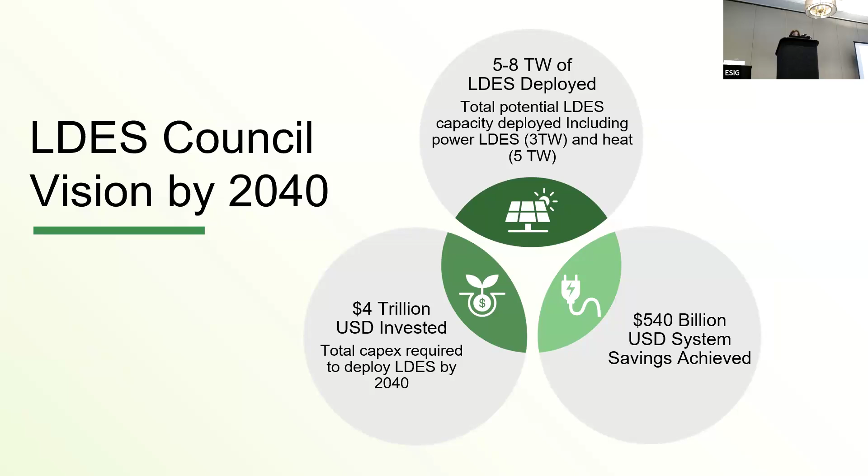So this is just a little bit of a snapshot into the scale at which long duration energy storage deployment needs to grow for us to be able to hit that 5 to 8 terawatt mark by 2040. We're far from there at this point, but we look forward to addressing some of the key questions, fundamental questions in terms of power systems and reliability to be able to fairly value and recognize these assets and hopefully demonstrate the bankability that will help us get to this deployment target.

So these are, as mentioned, some of the members that we represent. We have a fair number of technology developers, over 60 members across the ecosystem. And this diversity of members really reflects the breadth of LDES technologies, which I'll go into in a moment.

But in terms of the applications of LDES, LDES isn't a single purpose asset. It's used to firm renewables. It's used to manage congestion. It's used to provide backup during extreme events. It's used to shift energy across hours, days, or weeks. And its versatility is its strength.

Here we will be focusing on the power to power aspect of it - LDES as a grid scale transmission alternative, LDES in microgrids and distribution systems, and LDES in off-grid applications as well.

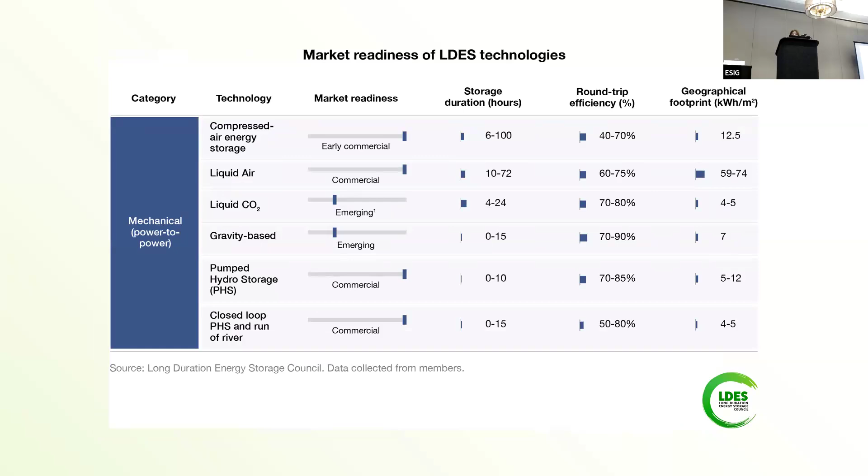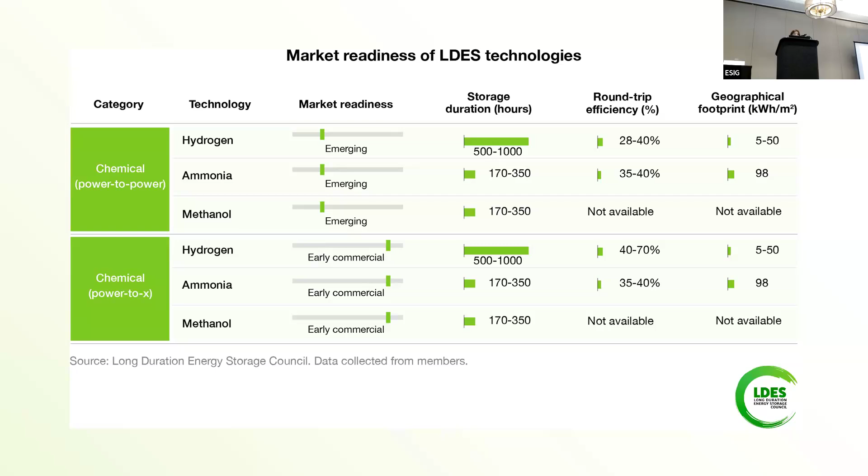So all of these different energy storage technologies fall within the definition of long duration energy storage. The LDES Council goes by any storage asset that can discharge continuously for 8 hours and up. That is our official definition. It's not necessarily scientifically rigorous - the US DOE has a definition of 10 hours and up, and some East Asian countries have much shorter durations that they consider long duration, from 5 to 6 hours and up. But this is what we go by, and therefore any storage system that can achieve these capabilities is considered long duration energy storage.

So as mentioned, long duration energy storage has multiple different capabilities in terms of risk management, in terms of real-time operations and beyond. It's used to firm renewables, it's used to manage congestion, used to provide backup during extreme events, as grid stability and power quality services, black start services, etc.

And most of the technologies within this range of energy storage can provide a variety of these services. So just to set the stage for the panel that we're about to have on accreditation and valuation of LDES systems, this remains an obstacle towards the deployment that we seek for long duration energy storage.

And the biggest bottleneck isn't the technologies, they exist, as I mentioned, but the bottleneck is planning. And most systems, I think we know, treat a 4-hour battery and a 100-hour storage asset the same. And the frameworks that we use to accredit capacity and model resource adequacy don't reflect the endurance, flexibility, the temporal range, or the resilience that LDES provides.

In addition, we're working with the traditional resource adequacy metrics. We had a panel yesterday on resource adequacy and how that is going to evolve, with perspectives from different ISOs. But the fact of the matter is it's important to take a look at these metrics that are used to value resources such as long duration energy storage, and reflect on the trade-offs between cost and reliability, or the value of preventing rare but severe events, which is where LDES specifically provides a lot of value.

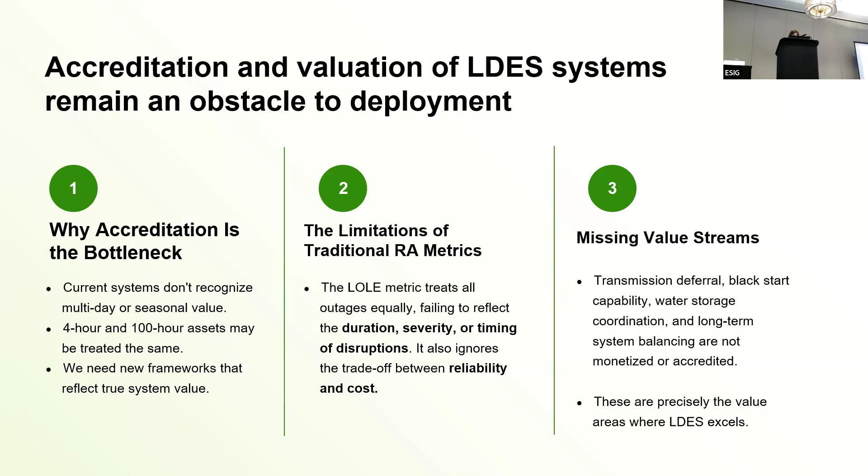With that being said, I think we can move on to some of the framing questions for this panel. Since we have varying perspectives from our speakers today, I just wanted to help our audience keep these questions in mind. How do we capture the true system value of LDES accurately, including multi-day reliability and seasonal adequacy? What are some operational data and insights that could shape how we model and accredit LDES today, known as a very difficult resource to model accurately? And what are the right metrics when it comes to looking at LDES systems? So that being said, today's session has 4 critical perspectives that you will now hear.

And I would love to call upon Gabe Miller, hydrologist from TVA, for his presentation.

Good morning. Thanks for braving the early morning with us here. I work for river management at the Tennessee Valley Authority, and I'm going to talk to you a little bit today about one of the oldest forms of long duration energy storage, which is conventional hydro. So I'm going to talk about how we manage our hydro system, and then also how we integrate and optimize our hydro system with our production cost model and the rest of our assets at TVA.

So a little bit about TVA. TVA is a unique organization in the sense that we are a federally owned utility company. We were founded in 1933 as an act of Congress. And really the reason it was founded was to electrify the Tennessee Valley, which was very underserved at the time, to promote flood control, navigation in the Tennessee River, which had a lot of flooding issues at that time, and also to promote economic development for the region that was very poor at that time.

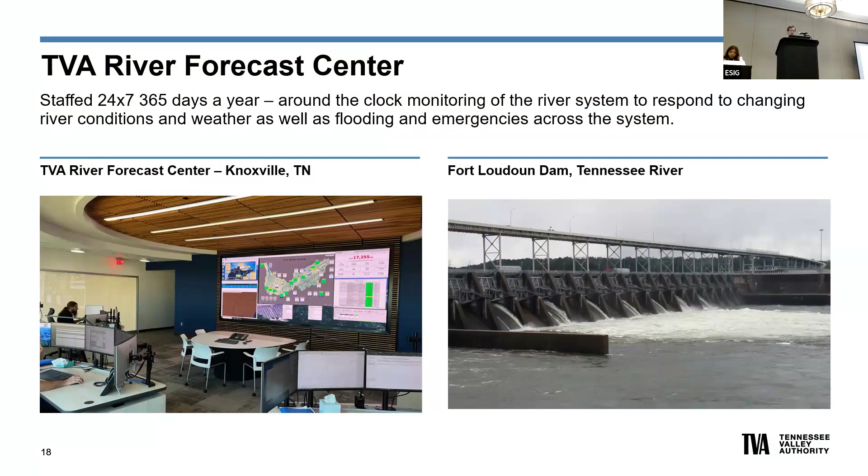So we have a 24/7 river forecast center in Knoxville, Tennessee, about 3 hours east of here, and that is where we manage our river system. We have a system operations center where we manage the rest of our assets in Chattanooga, Tennessee. And TVA also has a small office here in Nashville.

So just talking a little bit about what goes into how we manage the river system, I want to kind of frame that as we get into more of the power modeling, because a lot of that policy is really important in terms of what flexibility is left over for optimizing our hydro assets for power generation. And really the six major categories in terms of what we're looking at when we're managing our river system are: flood damage reduction, power generation, navigation, water supply, recreation, and water quality. And of course, there are other factors that go into that, but those are kind of the six main categories.

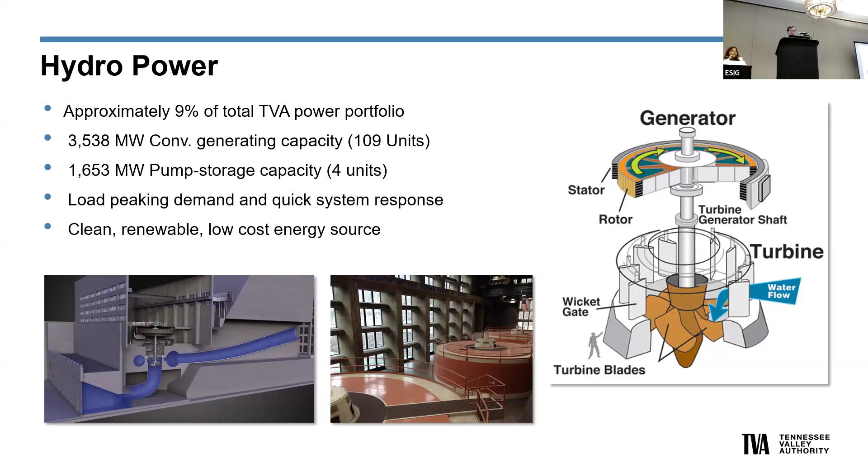So I mentioned that our hydropower is about 9% of our total portfolio, about 3,500 megawatts of conventional hydro. We have one pump storage facility as well, and we're considering building another pump storage as well. And Stuart's going to talk more later about pump storage valuation that we've been working with him on, valuing that as a future asset.

In TVA, all of our reservoirs are seasonal, so we don't have any multi-annual energy storage. Mainly what we're doing is raising the reservoirs up in the summer for recreation, water supply, and navigation, and then drawing down in the winter, which is really for flood control as the primary purpose. Our drier months are in the fall, so that fall drawdown also serves as water supply.

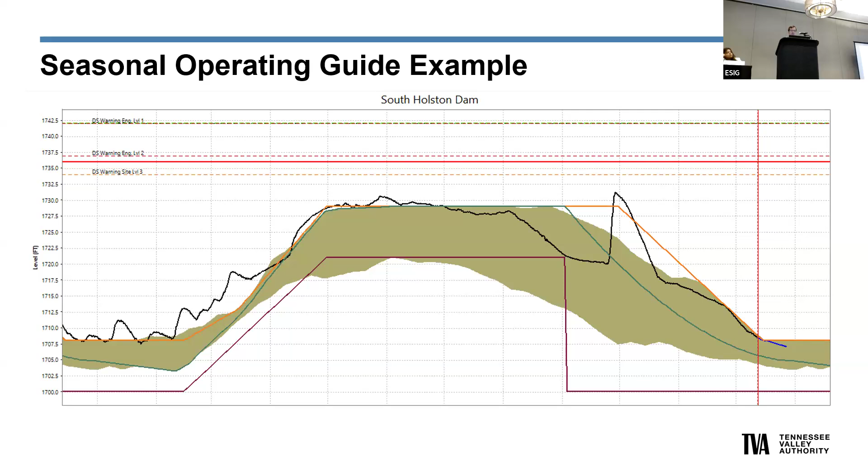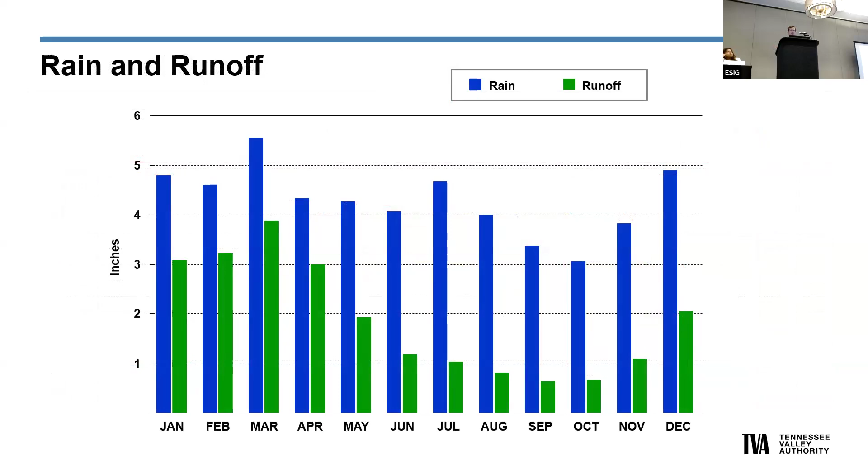Getting into that, we get about 51 inches of rainfall a year. Even though we're kind of equal on rainfall every month, the majority of the runoff is really in the winter months. That's because we have less plant withdrawal and evapotranspiration, which takes a lot of water out of the system during the summer months.

So one of the things I talked about was flood damage reduction. We have a number of tributary reservoirs, the ones in blue in that picture, and those are really our main storage reservoirs. We're storing water there, trying to keep it off of the main stem of the Tennessee for flood damage reduction.

One of the recent events, although TVA couldn't do a lot about it because it was more outside of our region, was Hurricane Helene last year, which did a lot of damage to Asheville and the surrounding area. This is actually some drone footage from Nolichucky Dam, one of our reservoirs, taken after the peak since it happened in the middle of the night. It actually blew a hole in that powerhouse. This is an old sedimented reservoir no longer used for power generation, and they've since gotten rid of that powerhouse, but it just reminds us of the power of flooding, which is one of our primary objectives.

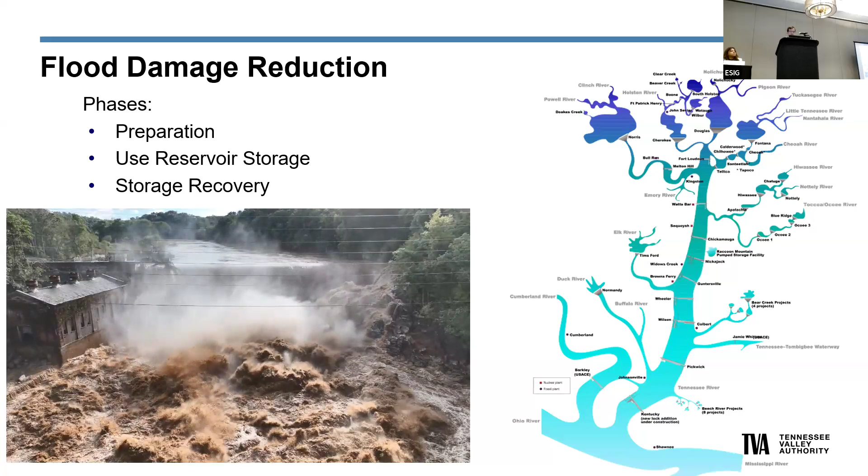Navigation: the Tennessee River is navigable all the way from the Mississippi up to Knoxville, Tennessee, as well as the Cumberland River, which is managed by the Army Corps of Engineers and can go past Nashville as well.

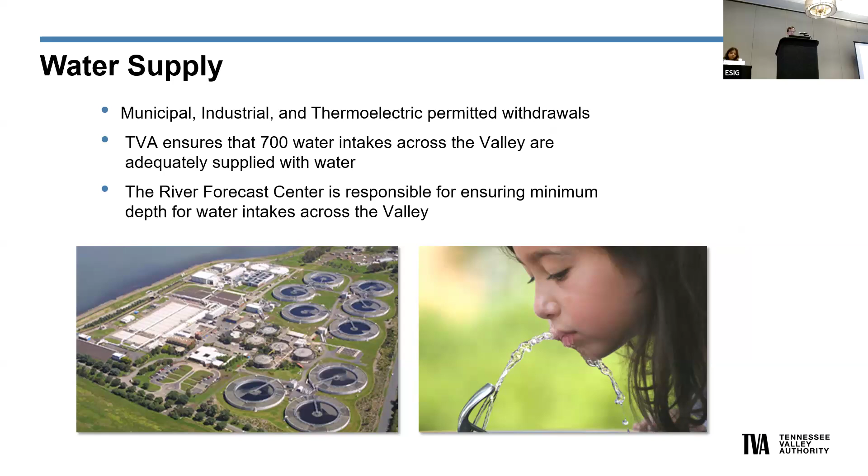Water supply - definitely not like out west. We don't have any of the water supply concerns that they do, but we manage minimum flows for about 700 water intakes throughout the valley. It's not as difficult as the water concerns out west.

Recreation is a huge part of what we manage the river for. The Tennessee Valley area is really known for its lakes, lake life, recreation, and fishing. There's also whitewater, so there's a lot that we do to manage recreation in the region. The University of Tennessee estimated it brings about $1 billion of economic benefit to the valley every year, which is something we like to pat ourselves on the back for.

Then there's water quality. We do a lot to try to maintain water quality in the river, whether it's pumping liquid oxygen into some of our reservoirs, using aeration structures, auto-venting turbines, and addressing other things like temperature concerns.

TVA is a little unique in that we can operate our river to help meet some of the temperature demands of our nuclear plants, especially Browns Ferry, which is downstream on the Tennessee River and gets really hot there. The water temperature can get to 85 or 88 degrees going into the nuclear plant, like a warm bathtub.

So we have a lot of temperature concerns around there, and we have 3D models we use to analyze the temperatures to help meet the permitting needs for how much we can increase the water temperature. You can see the outflow from Wheeler Reservoir in this picture, and the intake is right there. One interesting thing about Wheeler is that because the intake and outflow are so close, if we're peaking in the summer, you can get a sloshing effect where the water hits the downstream edge of the reservoir and sloshes back, sending that warm water back into the intake.

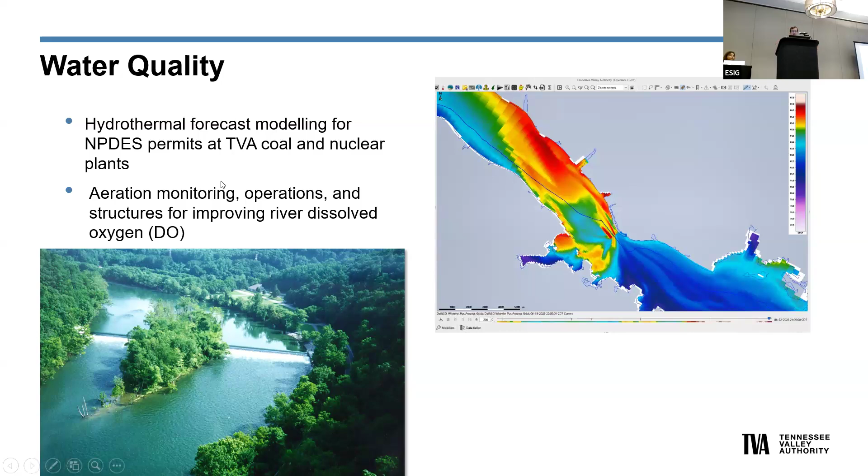So one of the things we do with hydro is try to maintain some steady flow during certain times in the summer, which also limits how much peaking we can do to meet demand for other things. So that's one of the constraints on how we manage power for the hydro system.

Talking about all of this, you can see a lot of these challenges: if you want flood control, water quality, and thermal compliance, those all want low reservoir levels, whereas navigation and recreation all want high water levels. So it's just a matter of balancing all these different objectives in terms of how we manage the system.

So I'm going to get into a little bit more technical nitty gritty now about how we do the optimization of our hydropower. There's a lot that goes into that, but I'm just going to specifically talk about how we integrate with our production cost model. One of the primary tools that we use is a program called Riverware, which is really where we're turning our water constraints into goal programming.

Specifically, we're moving towards the portfolio optimization model from ABB. And so we've come up with a new method. I guess one of the things I should mention first here is, TVA is not in a market, so we're a little bit unique in that sense.

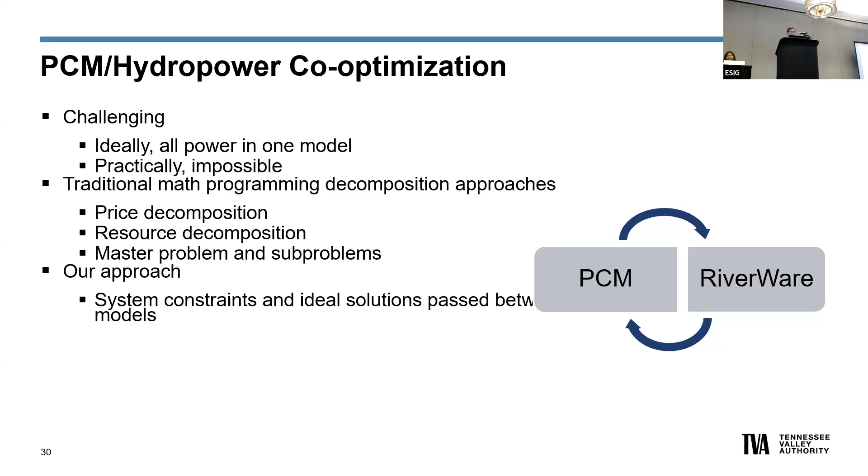And so the approach that we've taken is really we run a Riverware model that is an optimization model that comes up with really the constraints of our hydropower system. And so that gives us hourly min-max generation, daily min-max generation, and a 10-day target.

And this is passing to the production cost model as a single unit. So it's really simplifying the solution, saying all of our hydro is just a single unit in the production cost model, whereas we have over 100 different generating units in our hydro.

And then we run that production cost model, and it comes back and it gives us an idealized hydropower solution for this is what would be ideal in our system for running hydropower over the next 10 days. And then we ingest that back into those other subsequent models in our Riverware as an optimization goal.

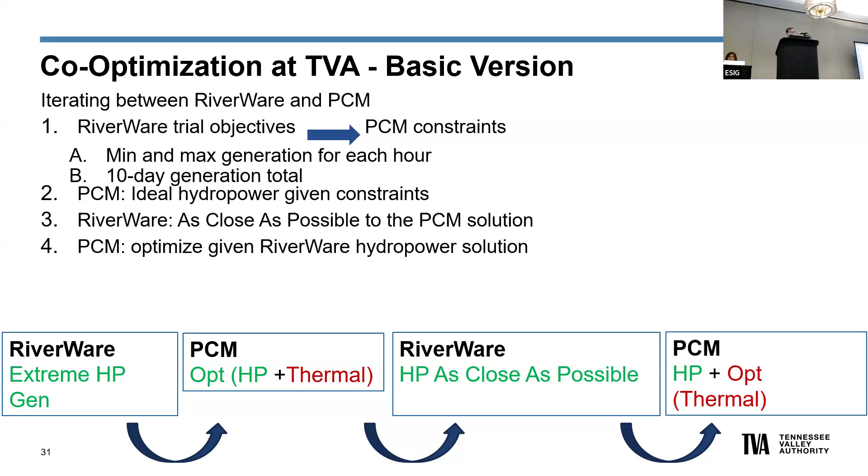So just a little bit of a diagram here to help wrap your head around that. We have a lot of physical modeling that goes into our hydropower system, whether it's modeling inflows, our hydrology into our system. That's where we're using a lot of similar tools to everyone else that was talked about yesterday.

We're starting to look at AI weather forecasts. We're starting to look at AI inflows, and a lot goes into all that modeling for how we model our hydropower assets. All of that data goes into these decision-making models, the Riverware.

Those hydropower constraints then go into that production cost model, which gives us back that idealized hydropower schedule that then goes into our short-term and our midterm Riverware models.

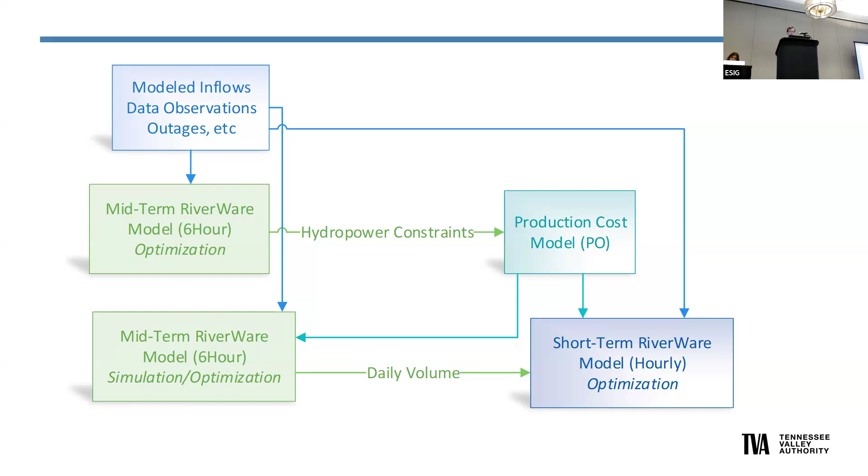And that short-term model is really what comes up with our schedule for the next day as far as hydropower, and then a preliminary one for day 3. So we actually do this twice. We do an idealized one with as most flexibility as possible, and then a more realistic one, and try to be between those two.

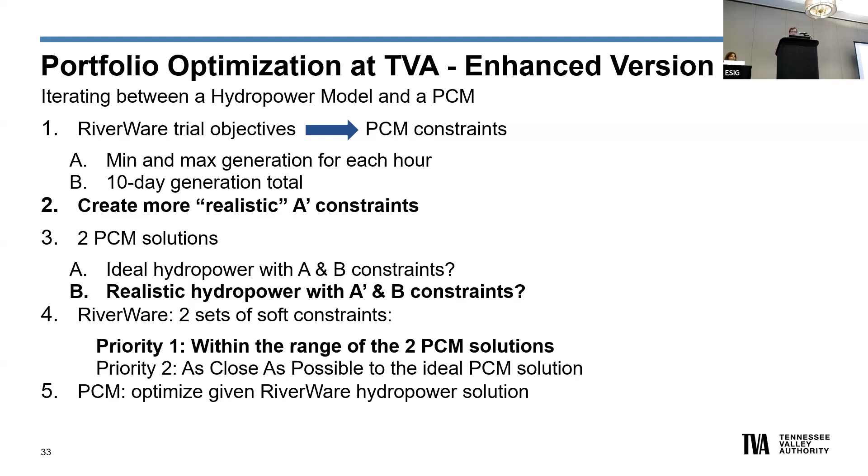So you can kind of think about the optimization here is we have all of these constraints on our system, and really what they're doing is shrinking the optimization space. All those other demands, whether it's flood control, water quality, they really limit the amount of flexibility that we have in hydropower. And so whatever flexibility is left in that optimization space is what we're using to try to optimize that hydropower generation for the rest of our assets.

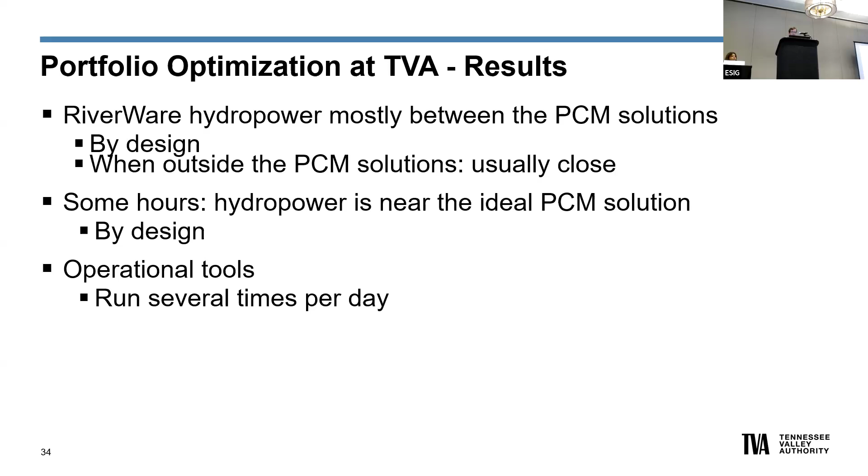So that's been working really well. We're actually just moving towards this new portfolio optimization model. We'll also probably integrate with some new GE tools that we're using. So it's a kind of a unique method that we're using for this hydropower optimization.

And we have some potential enhancements. We can get more data into our production cost model to get more realistic things like ramping constraints. I think where we're moving towards is we're mostly optimizing our hydropower on that two-week period where we can move water around for a big event, or on that day ahead.

And I think as we integrate more renewables into our system, we're going to get pushed more in hydropower to have more real-time flexibility. We do have real-time flexibility, but most of it's the balancing authority will call up and say, what can you give me right now? Or what can you turn off right now during a turn down situation?

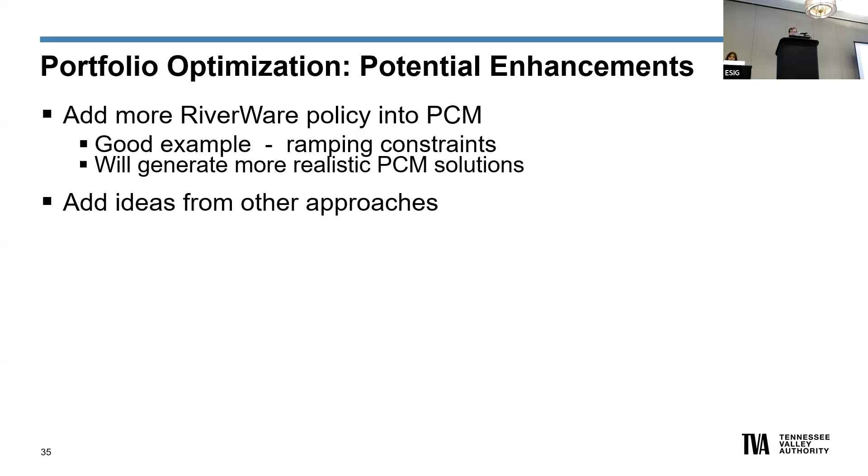Got a little lazy there for a second. But thank you, Gabe, for a really compelling look into TVA's hydro operations and how optimizing tools navigate real world constraints. So that operational ground gives us a really good starting point for the rest of our panel speakers.

Next, we'll hear from Stuart Cohen at NREL, who will bring a planning and modeling lens to the conversation, with a focus on valuation of pumped storage hydropower.

Great, so thanks everyone for being here. I'm going to give a pretty broad overview of a lot of things that we have going on in the pumped hydro space. So for those less familiar, I'll start with just kind of a why pump storage, why are we thinking about pump storage valuation. I'll introduce you to a lot of the things that we're doing at NREL on the data and tool side to help with these questions, and then I'll get into specifically how we're using some of those with TVA, so it'll be a good follow up from what Gabe was talking about.

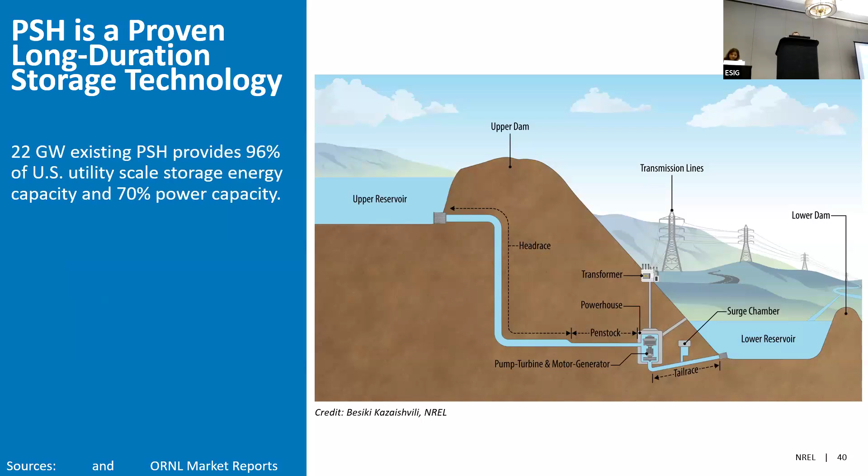So first off, why are we looking at pump storage? If you're less familiar with this technology, it's a proven long duration storage technology. In the US today, we have about 22 gigawatts. And while batteries are certainly making really rapid inroads in the capacity space, from an energy perspective, pumped hydro is still well over 90% of the energy storage capacity in this country.

And so today it's the only really widely deployed long duration storage technology from an energy perspective at the utility scale. And if you're unfamiliar, there's actually a lot of action, at least in the licensing and permitting space around pump storage in the US. The development pipeline has around 100 gigawatts in some stage of the process. There's only a very small portion of that in the detailed planning stage.

But what's also good to put into perspective is that globally, there's a lot of action in this space. So 50 gigawatts is currently under construction. A lot of that is in China and those countries, but also in Europe, India. So there's a lot of global demand for looking at these long duration storage energy solutions. And that's one of the reasons why in the US, we're thinking about, okay, well what is a way to advance our understanding of the value proposition to serve the needs of the future.

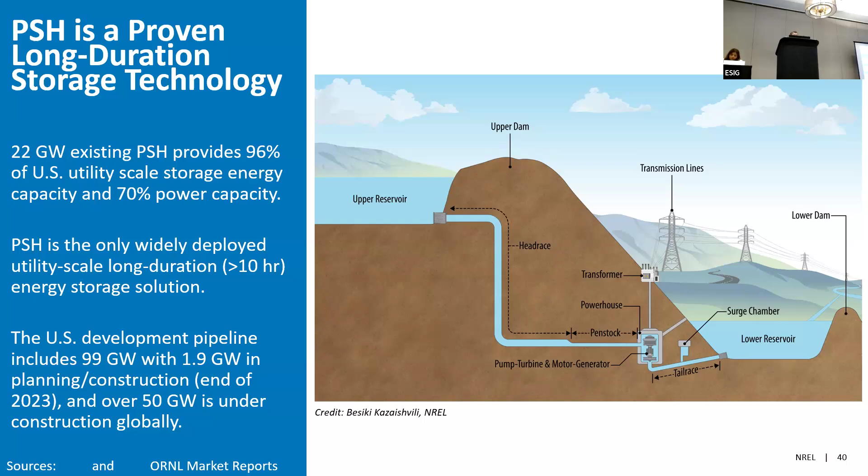And so the reason for thinking about pump storage, and I already saw a similar table as this, is that it can really provide this full range of grid services, all the way from your bulk capacity energy services, all the way down to short-term stability, frequency stability, voltage control, and even system restoration, black start. And so it definitely depends on the facility, because oftentimes these are hydropower facilities integrated into river systems. But in general, these units can ramp really fast, switch relatively fast, maybe not quite as fast as lithium-ion batteries, but you have a lot of flexibility just with the system designs.

Today, all of the pumps in the United States are fixed speed pumps. So that does have some limitations in flexibility, especially when you're in pumping mode. They're either really at a given pump at 0 or 100%. So that certainly limits a lot of the regulation and stability services it can provide in pump mode. But a lot of the conversations around the new proposed facilities are actually around variable speed units, and that's so you can get this full range of grid services, both in pumping and generation mode.

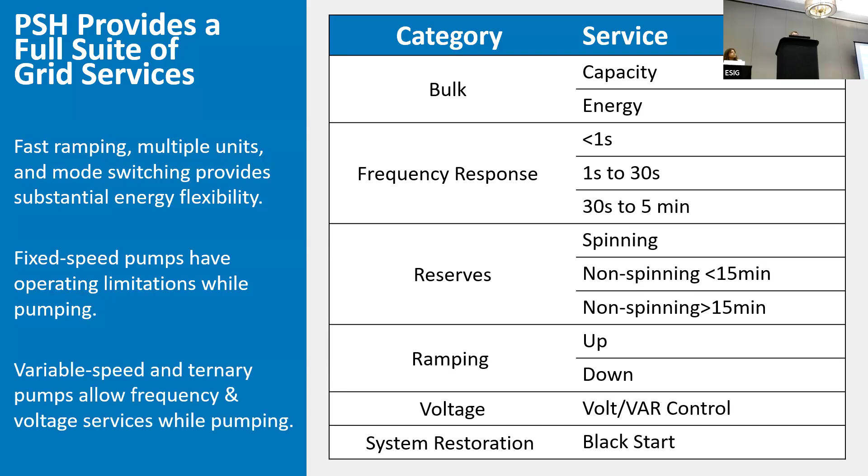Like I mentioned, and has already been discussed, one of the key challenges in this space is valuation. I have one slide to introduce you to what the labs and DOE are doing in particular to think about this space, and that has to do with an effort called the Hydropower Vision Roadmap. We put out a study back in 2016 looking at a future vision for the hydropower industry, and the labs are continually working with industry around framing what could achieve that vision and what actions should take place across the industry to meet those goals.

Since this is a new audience for me talking about this hydropower space, I wanted to introduce you all, because I think one of the stakeholder groups that might be less represented is the broader power sector community. We have a specific area looking at improved valuation, focusing on recognizing the value of different services, understanding how to compensate them, and then how to translate that into financing support. I think that's honestly a really consistent discussion across a lot of the long duration storage technologies and technologies that provide these flexibility services. I'm very interested throughout the rest of this meeting to talk to you all about this space.

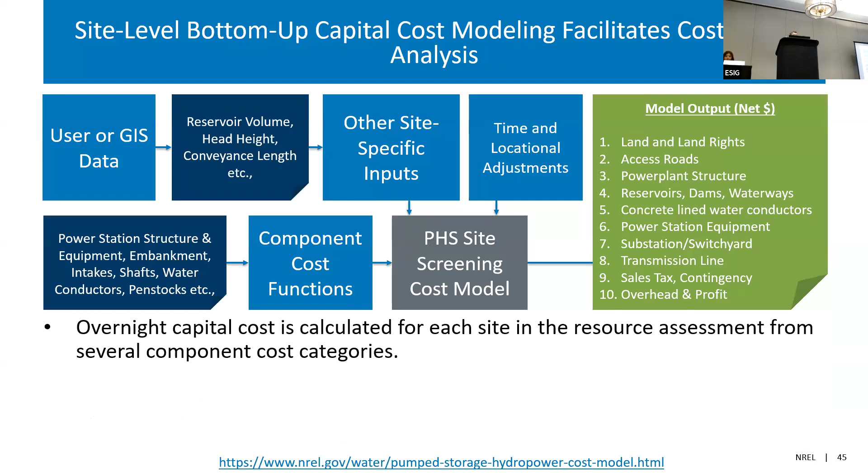Built into that is a cost model. We've worked with industry folks, engineering, procurement, construction firms, using a lot of the information available from an EPRI design guide, and built an actual bottom-up cost model to look at pump storage as well. That's another way we're trying to put publicly available, open tools out there for people to think about this technology and how it fits into their portfolio and their considerations. Right now we have a downloadable spreadsheet, but we're actually working on an interactive web tool to use with that as well.

Bringing this more towards what's probably the bread and butter of people in this room—how does that feed into the power system models? I'm not going to go through everything, but this slide gives an example workflow that at NREL we use for a lot of our studies, where we go one way and sometimes iterate between capacity expansion, long-term planning models, feeding those future infrastructures into production cost models, looking at resource adequacy, maybe even nodally downscaling those to run in power flow models and look at short-term static and dynamic stability, trying to create a fully integrated system modeling approach to understand what the future could look like.

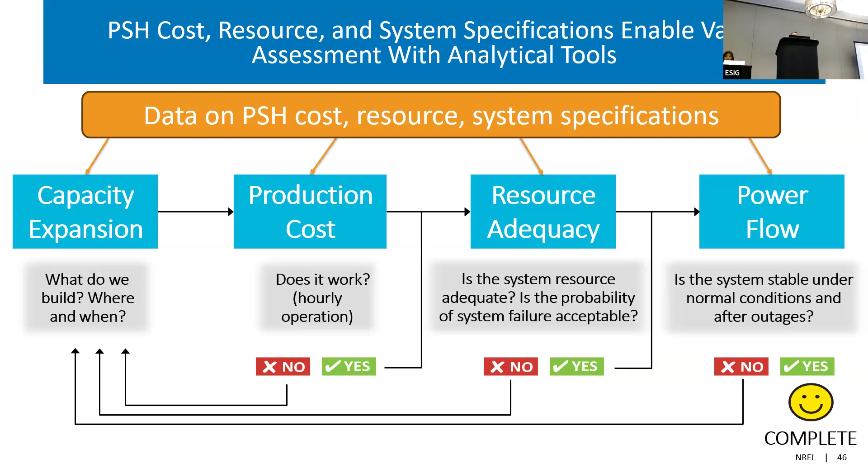The point I want to make in this context is that on the pump storage side, we're developing data and tools all the way from resource assessment, cost modeling, all the way down to dynamic models for variable speed pump storage systems, to be able to look at all this space.

One example of how we're doing that is with TVA. The Department of Energy's Water Power Technologies Office funded this work, and they funded a lot of projects looking at pump storage valuation—Todd from Argonne is here, they do a lot of that work. This is just one example: we're working with TVA to help them understand the value proposition for a potential new pump storage project, because of the challenges.

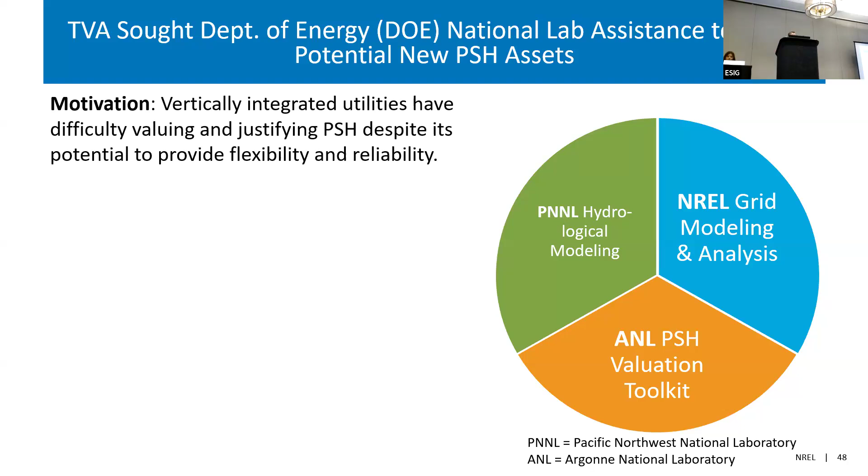These are multi-billion-dollar investments. It's one thing to finance a small 2-hour battery that's very modular and you can stack and grow over time, versus wanting to invest $4 or $5 billion in a new dam. So it's a different discussion with a bank, I'd say.

So this is a challenge. The idea here is to bring in some of the more research-oriented, forward-looking tools, thinking about different ways to represent long duration storage and other parts of the power system, and see how that influences the discussion around valuation.

We really did two things in this effort. One was to do a deep dive into looking at their modeling approaches and think about ways that could be tinkered with, improved, and expanded upon. The other thing was to do some parallel modeling and analysis ourselves.

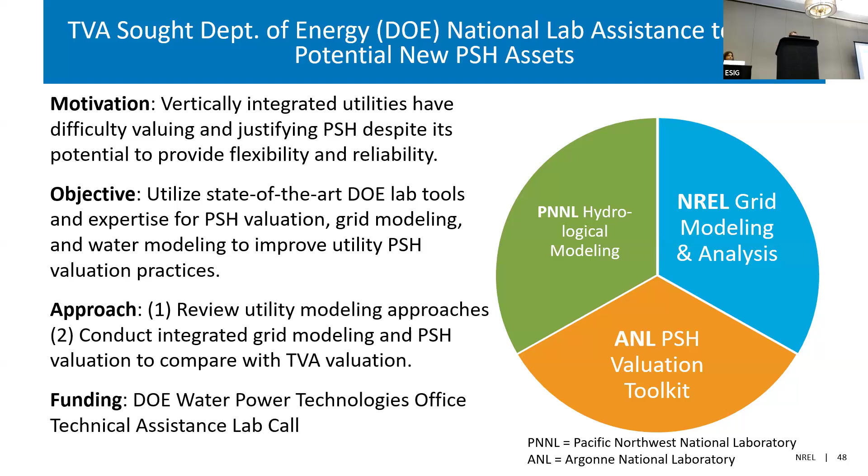This is from the Water Power Technologies Office. I'm going to focus on number 2 here in the interest of time. What we're doing in this study is a collaboration between NREL, Argonne National Lab, and Pacific Northwest National Lab. PNNL is focused on the hydrology side. Argonne is working with this pump storage valuation toolkit, which is more of a screening level valuation analysis. And at NREL, we're doing the rest of the stuff.

We have our ReEDS capacity expansion model that's currently fully integrated and iterates with the resource adequacy model, PRAS. Then we're taking those solutions, downscaling them into our PLEXOS production cost models. And on the side, in parallel, doing some power flow and stability modeling.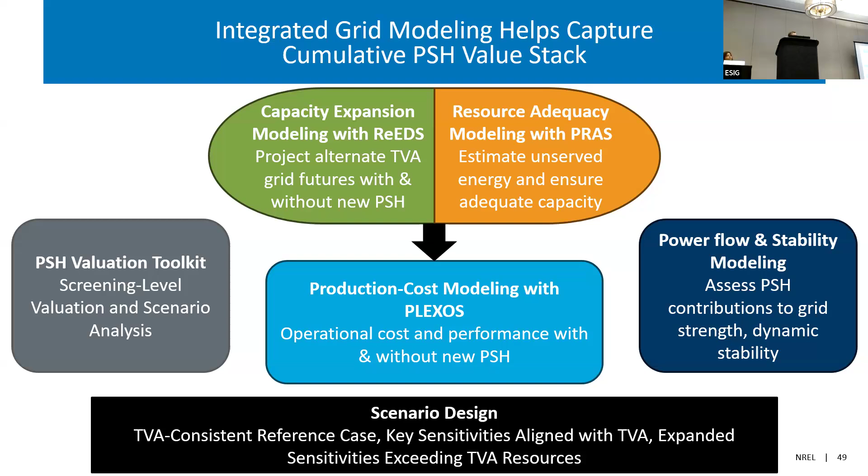I'm just going to briefly go through some of the preliminary findings we're exploring in this space. We're not quite to the point of giving the cost numbers and actual value assessments, but I just want to give everyone a flavor of how we're looking at this.

The first thing on the capacity expansion modeling side is to look at a range of portfolios. We've worked very closely with TVA, also thinking about what they're already looking at in their IRP procedures. We're defining different scenarios to try to get a range of technology mixes for the future.

This figure shows the 2050 capacity mixes and generation mixes in TVA for just a few of the scenarios we're exploring, just to show you the range of how we're tinkering with fuel prices, technology costs, and even deployment limits and considerations on variable renewables to look at these futures.

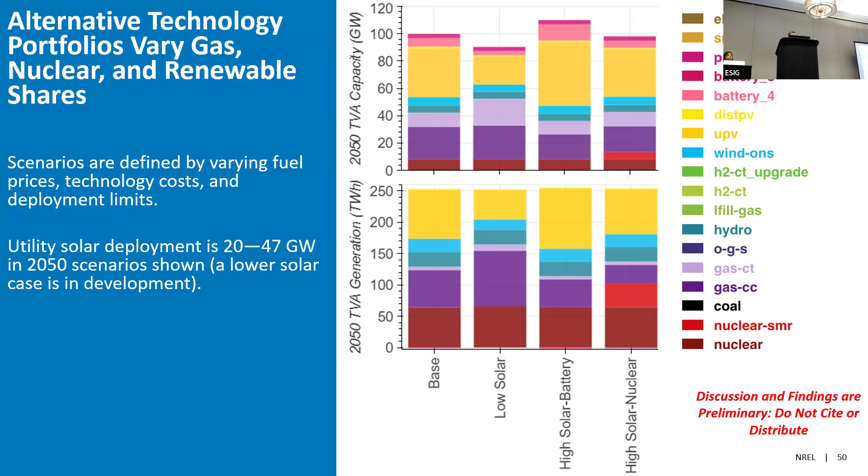For example, the scenarios shown on this figure are looking at a range of 20 to 47 gigawatts of solar in 2050. We're actually trying to get an even lower solar number just to get a bigger range there, because that balances out with what happens in the natural gas space, and even scenarios for what if there was some new nuclear deployment, small modular reactors, something like that, and so on.

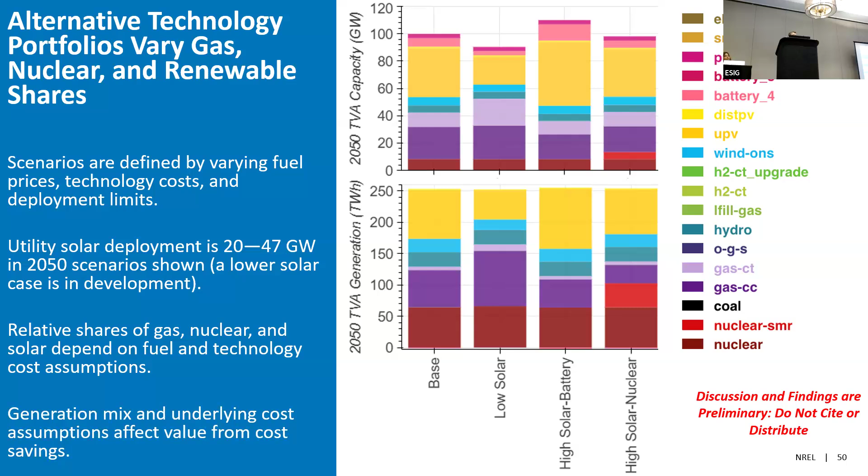The reason for this is because this generation mix is going to influence the value proposition for that pump storage unit. So for example, if you look at those four scenarios with and without this proposed new pump storage unit — I apologize, the colors here are challenging because the pumped hydro looks a lot like the 8-hour battery — but basically on the positive side you're going to see pumped hydro and maybe some other stuff.

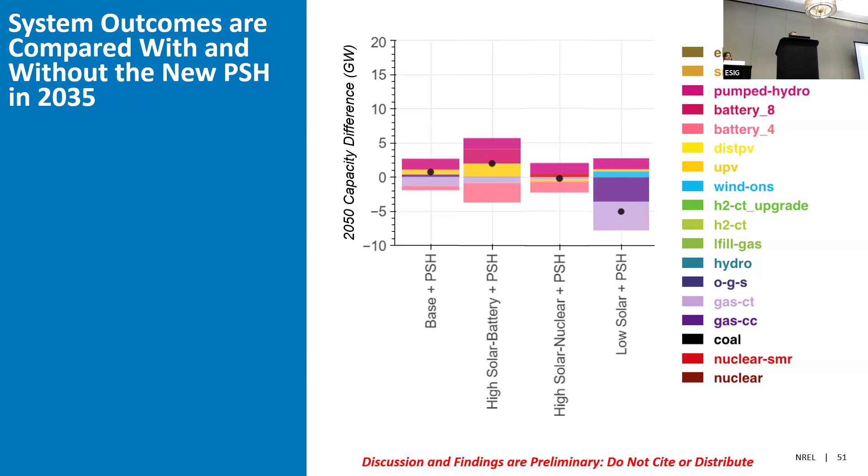On the negative side, it's going to be whatever wasn't built because that pump storage showed up on the system. This is preliminary, so I'm not going to make any strong conclusions about what's going on here. But the idea is that in these different scenarios, these different grid mixes affect what the pump storage might displace.

Generally, it's probably obvious to people in this room — they're going to compete and displace with other flexible technologies, batteries, and natural gas. But the extent to which it does that, and which technology it does that with, depends on the scenario.

We also see some complementing of things like solar and even a little bit, in this case, nuclear, which is interesting. So again, that's just to say that changes in infrastructure determine the impacts of pump storage on not only the investments, but also ultimately the costs. Eventually we're going to be looking at the cost implications of this and using that to inform some detailed financial analysis that Argonne is going to do. On the production cost side, this is even earlier stage.

So I just wanted to show some examples of what's going on. We're taking these planning model solutions and running them in 8760 dispatch simulations to understand how this new pump storage would operate.

One known operating challenge in a lot of regions is that we built these pump storage systems in the 70s to complement nuclear, knowing they'd pump at night and run during peak loads in the day. Now with all the solar, that's completely flipped.

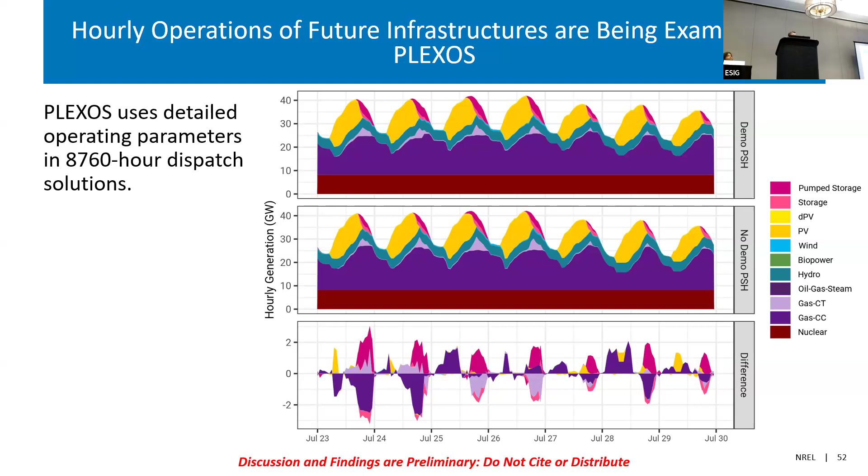So there are a lot of questions and considerations around when you're going to pump. Now we're thinking about pumping at the nominal gross peak load condition, which can create stability considerations. Those are the types of things we're starting to dig into with these operations models.

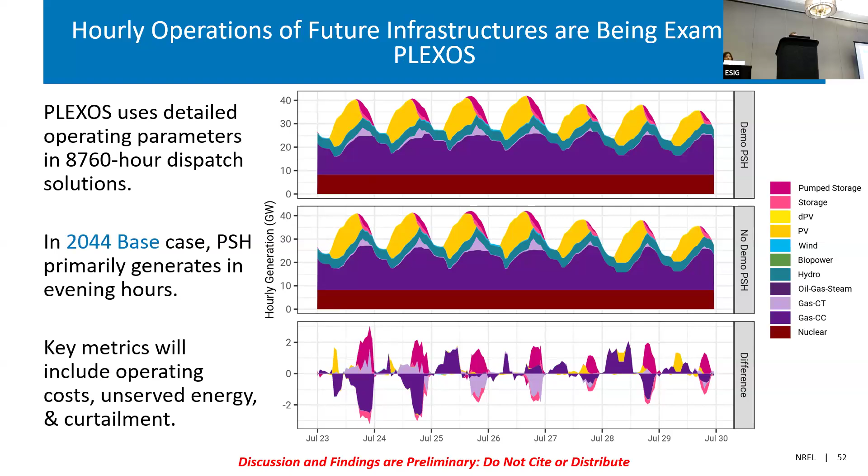You can see how in this example the pump storage is generally outputting electricity in the evening hours, early evening. We're going to be looking at the cost implications of this in addition to things like unserved energy, curtailment, and so on.

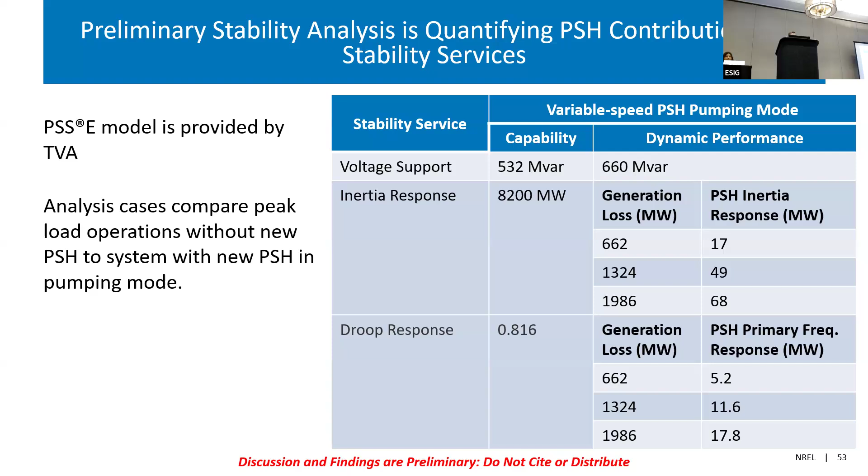This is an example of what we're doing in the short-term stability space. We're using PSS®E models that TVA has provided, looking at things like voltage support capabilities, inertia response, and droop response. I'm a mechanical, not an electrical engineer, so this gets further from my area, but we're doing a lot of simulations looking at the grid strength and stability implications of this new pump storage unit.

So that's what I cobbled together to present today. The key thing I want to leave everyone with is that pump storage is an established storage solution, but it has a lot of potential for the future. Understanding the valuation and compensation conversation today is really important because it's different than when we built these in this country in the first place.

NREL is creating a lot of data tools, and other labs are doing this as well to help inform this conversation. I just want to raise awareness of all that. We think a lot of the capabilities and tools we're building on the lab side can really complement what's happening on the commercial and utility side to have this discussion.

So that is all I have. And that's all.

All right, thanks Stuart. That was an amazing presentation and a clear reminder that even established long duration energy storage assets like pumped hydro can be undervalued if our tools and operational models aren't designed to fully recognize their contribution across different services and different scenarios. So thank you for that.

Next up, we'll be building on that with Donny Holaschutz from inodú, who is going to talk about how we accredit resources in the first place, before which I think we just have a little bit of a slide switch.

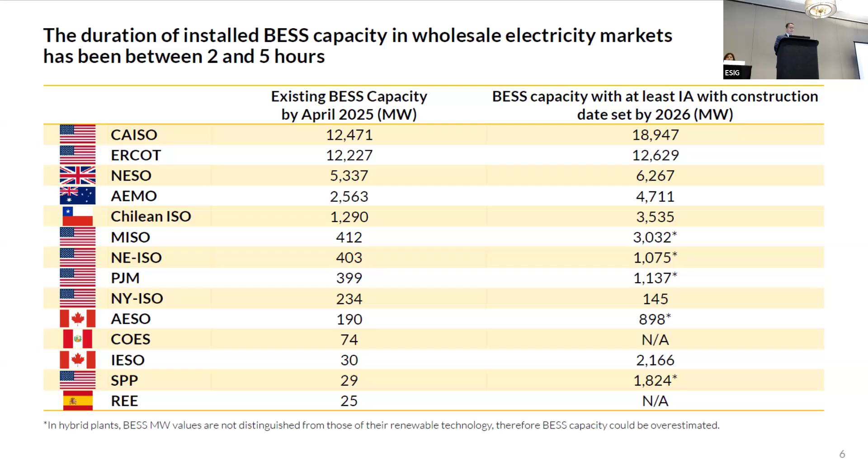We can see the existing capacity in the different markets. CAISO and ERCOT are growing, ERCOT added about 5 gigawatts last year. What's interesting is we see a lot of development in the pipeline as well. On the right-hand side, we see all the energy storage assets with an interconnection agreement set to be developed by 2026 or being reported that way. So there's a lot happening in the market, but not a lot with long duration energy storage besides pump storage.

Essentially, it's something that is emerging, new technologies are emerging. So I'm going to talk a little bit now about the overview of some of the challenges to assess resource adequacy and capacity contribution accreditation.

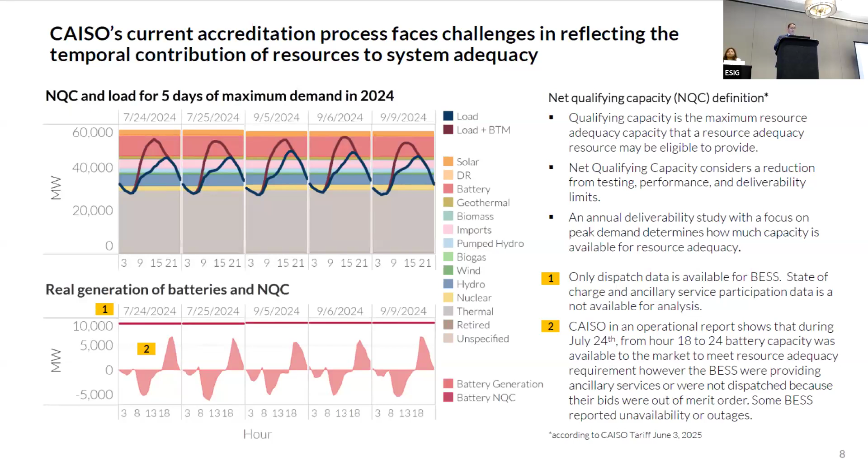But this raises a question: what happens during other periods that are non-peak? Is one value for a monthly accreditation the right way to go? This starts showing a challenge.

I think this challenge has been detected. Yesterday there was a great resource adequacy group talking about some of these challenges and trying to address seasonality in capacity markets. CAISO and the CPUC are going through this process as well, and there's something going on in the market.

I don't know if you guys are familiar with the CPUC slice of day, but that's a new approach in terms of accreditation they're looking at. They want to look at the contribution of the different resources through the 24-hour period and understand that. Looking at the history of how that came about, they said, hey, there's something going on, we need to change this resource adequacy framework. They basically laid out a couple of principles early on for why they want to do it: they want to make sure they're actually balancing the grid and minimizing costs.

They're also addressing the hourly sufficiency, reliable operations, and meeting the environmental goals. They're balancing the granularity and precision and meeting the hourly resource needs. So this idea of temporality - we need to meet the needs of the system throughout the year, hour by hour, essentially, and we want to do it in a simple way. There's something going on that's complex about how we're doing it today.

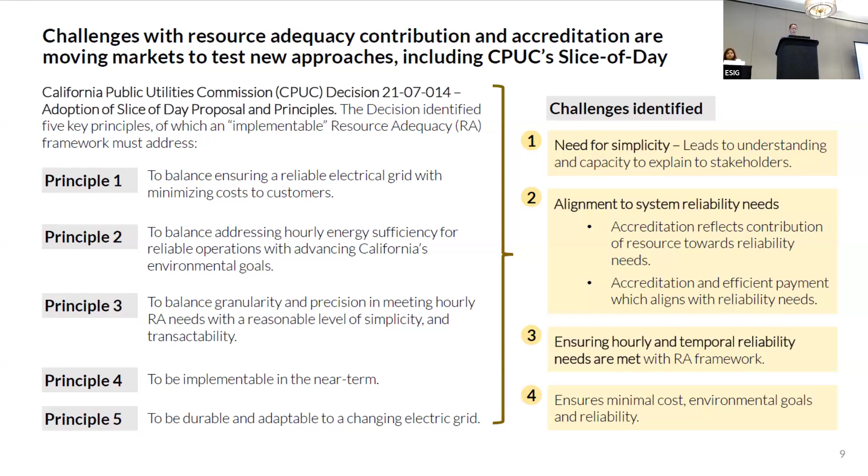So ESIG has published a couple guides on resource adequacy, and I grabbed some nuggets from the guides that I think are important, talking about some of the needs to look at how we do resource adequacy, and take a broader perspective so we can align the system needs and really have the resources that will be there for all these envisioned future operations.

One of the nuggets from the guide says: early tools evaluated only single peak load periods and did not assess risk of shortfalls across the entire year. So really, we need to think about resource adequacy from a more temporal perspective, a broader perspective.

Establishing the appropriate level of power system adequacy requires the collective judgment of planners, regulators, customers, and other stakeholders. And that goes to my figure on the right. Essentially, whenever we think about resource adequacy, we need to think about how we balance these other drivers to be able to meet the expectations of the system and the reliability. But it's not only reliability - we also have to make sure we're taking on the same risk, ensuring the right performance, meeting the stakeholders' needs, and communicating to them.

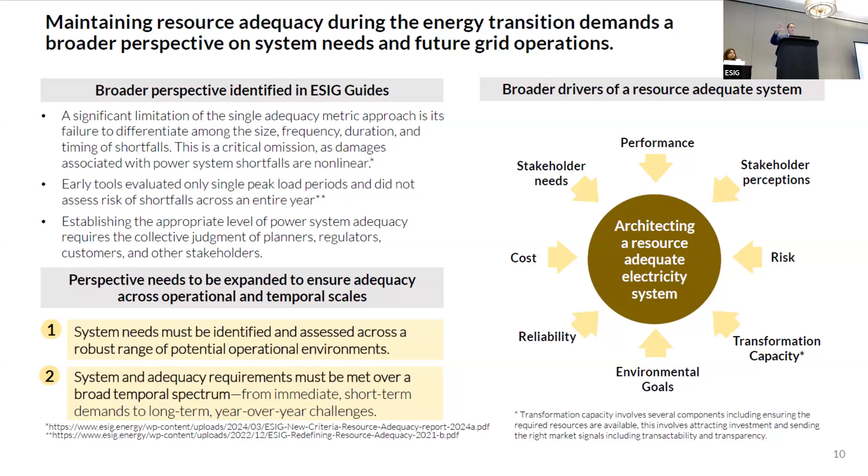So two things that are relevant in terms of the perspective we need to address: obviously we need to address these system needs in a robust range of potential operational environments. We really need to think about how the system is going to operate and expand our views. And we also need to do it on a broader temporal basis, essentially.

And what do I mean by a broader temporal basis? We need to think about the critical periods of the system from an instantaneous perspective all the way through a yearly perspective. Our traditional focus has really been making sure we have enough hourly energy and capacity - we meet the hourly and energy capacity constraints during peak hours.

But if we're going to want to uncover the value of long duration energy storage, we need to look beyond that. We need to look at the non-peak hours. We need to look at the days with supply constraints, because sometimes it's not a capacity constraint, it's an energy constraint in the system with renewables. We need to look at the seasonal supply constraint, and we also need to look at the instantaneous.

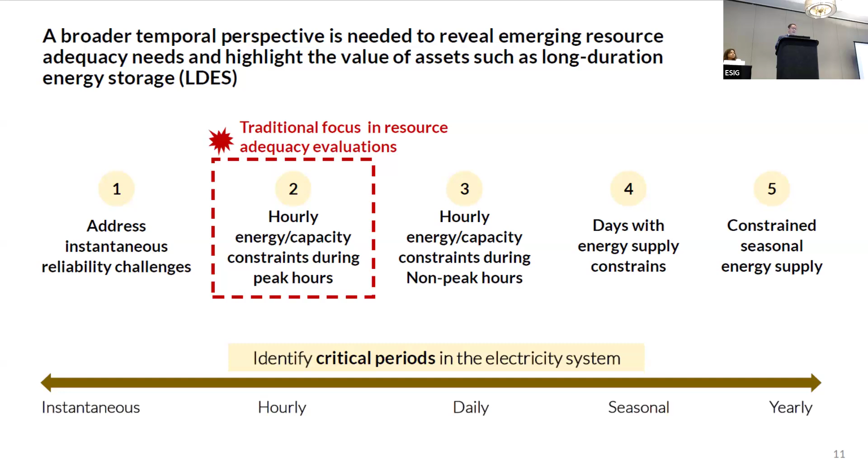And I'm going to focus on points 3, 4, and 5 later on to give some examples. But actually, number 1, Stu was talking about that in terms of how pump storage can provide those services, and that's actually quite important as well.

Traditionally, whenever we're looking at resource adequacy evaluations - this is a figure I drew to try to organize - we're really focused on whenever there's resource adequacy accreditation, evaluation, and determining the contribution. Basically, we're very focused on these stochastic risk methods, which are important, and we're expanding our view on adequacy metrics and target, which is going to expand the way that we look at risk.

And in some other places, we don't even use these stochastic methods. In some other markets around the world, there's more historical and heuristics and just performance during critical times, essentially. And this is sort of the methodology that's developed over time.

I think one thing we need to do is broaden this, not only through the temporal perspective, but also be able to do conceptual analysis to ensure we have a resource adequacy system that meets the goals, needs, and envisioned operational environments. These risk assessments do not really cover all the envisioned potential environments that are going to happen in the future.

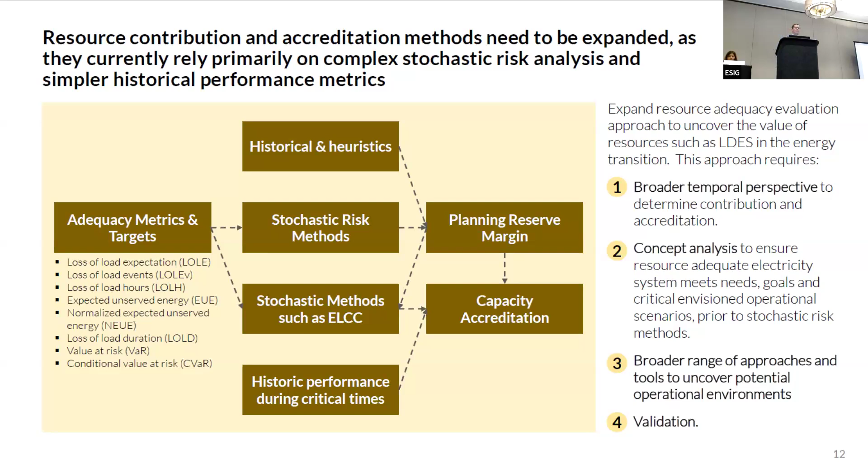So we need to broaden the way we look at that. For that, we need more tools, and we also need validation. I'm going to go through the concept of validation and why it's important. I'm a systems guy, I love systems thinking. I went to grad school for that.

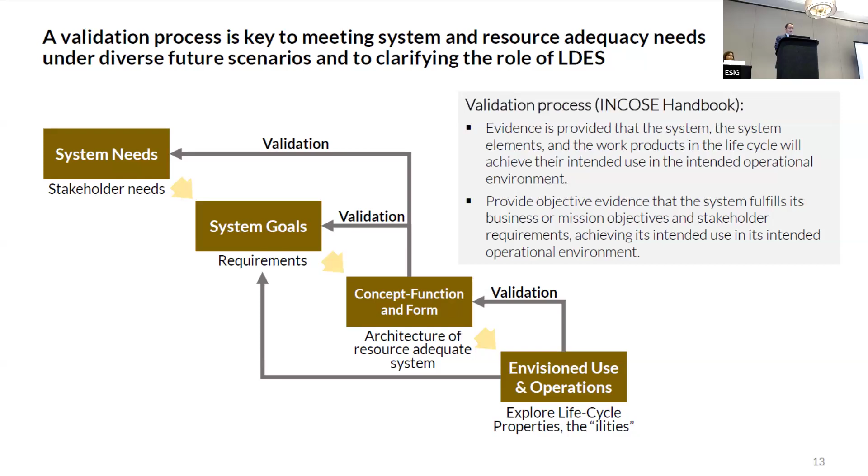So I'm bringing back some grad school notes and some stuff from the International Council on Systems Engineering. What is validation? Validation is a process where we make sure we're meeting the system needs and goals, but we're also putting the concept we're developing, its function and form, or the architecture of the resource adequate system, through very different envisioned operational environments, to make sure we're meeting the system goals and needs through this broader perspective.

So whenever I try to summarize how we do resource adequacy, essentially what we need to do is expand our approach. We need an approach where, whenever we're doing modeling and assessments, we're thinking about the system needs, the system goals, developing concepts for a resource adequate electricity system, and doing analysis through production cost analysis, historical analysis, reliability modeling, real-time modeling, across a broad spectrum of temporal basis.

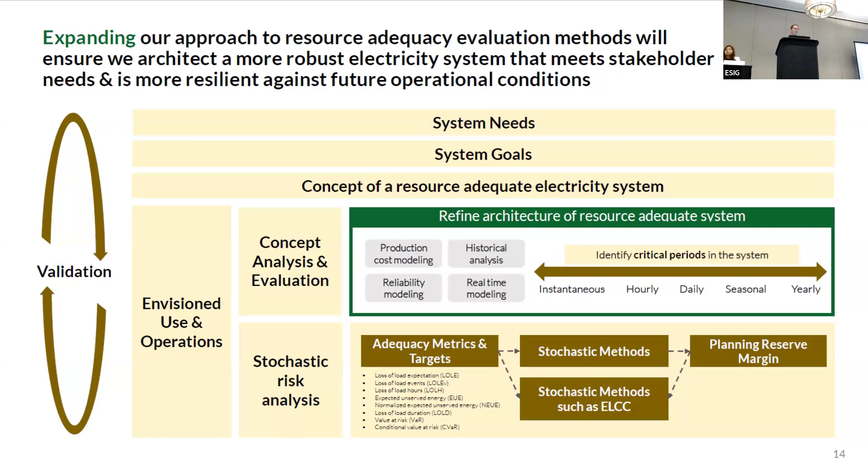So we're making sure we're covering critical issues happening in the very short term, which really led to, for example, the blackout in Chile with high integration of renewables, really related to short term issues. But we're also uncovering issues that are daily, seasonal, and yearly, doing that type of assessment as well, and doing stochastic risk analysis for envisioned use in operations, complementing it with other types of analysis, going through this validation process.

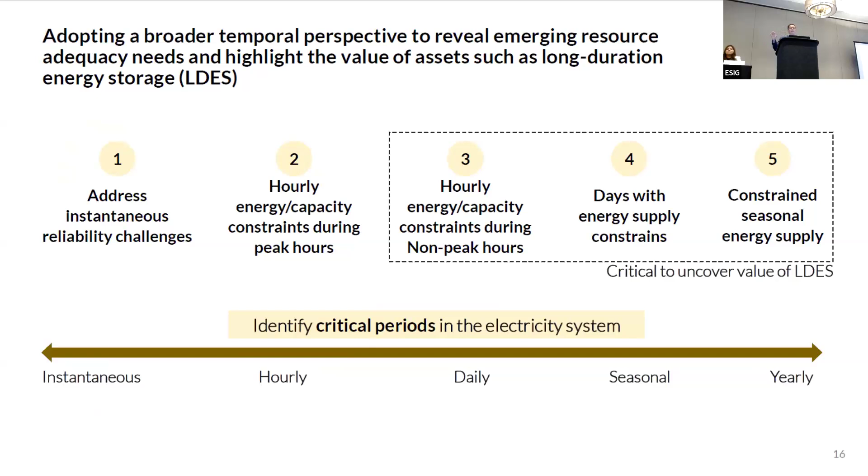So I'm going to dive a little deeper into why it's important to adopt a broader temporal perspective to assess the value of long duration energy storage. I'm going to focus on three points: the value outside the peak hours, essentially the daily supply,

the daily supply constraint, and the seasonal supply constraint. So whenever we look at the off-peak constraints, what we did here is run a production cost model using the IRP's assumptions, the preferred system plan in the CPUC's 2022 to 2023 IRP. This graph is hard to understand, but what we have is the 24 hours of the day, and the line on top is the top 5 days of maximum load for each hour of the day.

And then on the bottom, we have how much short duration energy storage capacity remaining they had, and how much they dispatched. What I mean by remaining capacity is the amount of energy they had stored and how much capacity they had available to actually give to the market. This is done through a day-ahead type production cost model, and it doesn't show the real-time deviations that could happen and what could really go wrong.

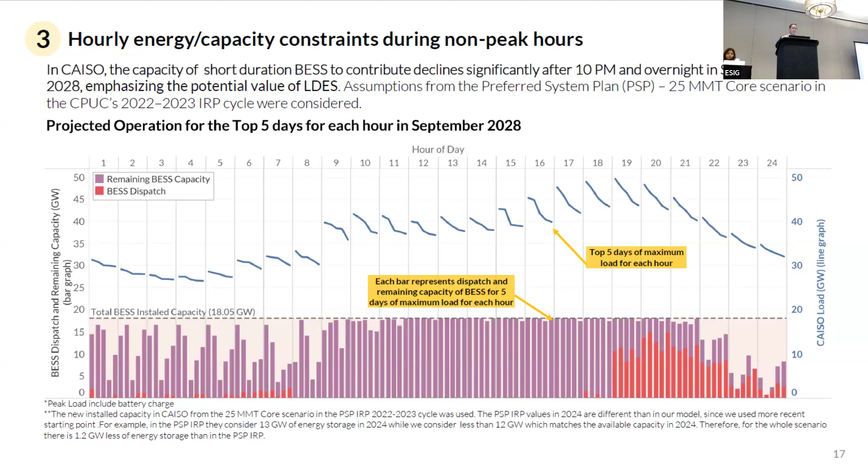But what it shows us is that short duration energy storage after 10 p.m. doesn't contribute a lot to the system. They basically contribute with less of their capacity during those hours of maximum load. And whenever we looked at this further, we see that when we run these production cost models, the reserve margins being defined are actually not being met during the night. There are challenges - they're much lower than what's actually being said through this stochastic risk analysis.

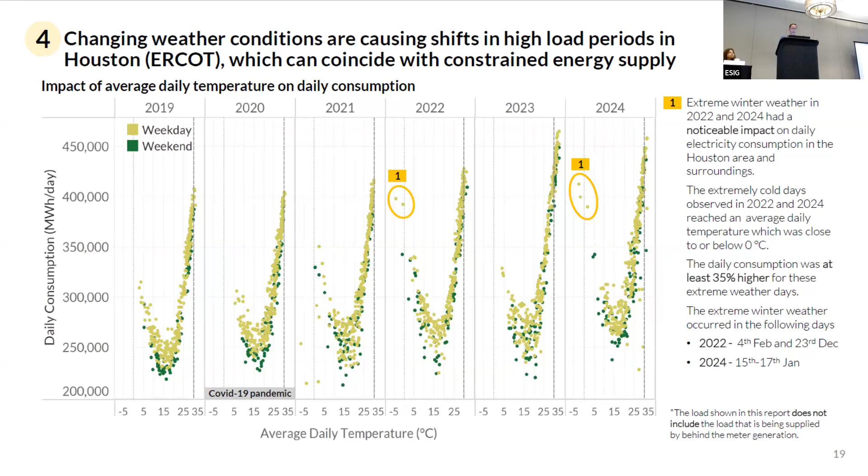Another challenge we want to showcase is this issue of seasonal constraints in the system, and the example here is CAISO. We have the daily production, daily demand, and daily manageable generation for 2024.

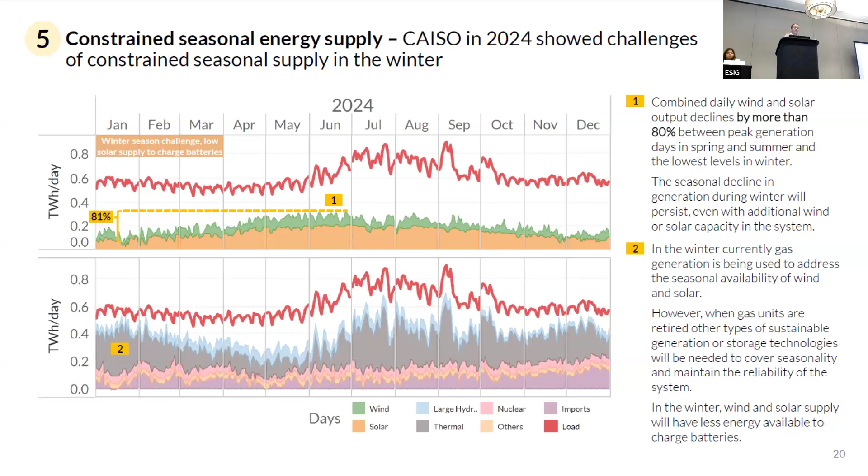And we see that the daily production of wind and solar, on the worst winter day, drops by 81%. So how are we going to charge batteries, or what resources are we going to need to replace all that gas and all those imports that supply demand? That's the type of questions we need to be answering when looking at contribution and accreditation.

So when we talk about the challenges, there's another one: how do we connect system adequacy needs with the functions and attributes of different assets in a technology agnostic way? If we think about traditional resource adequacy accreditation, it's been kind of limited in many ways, and it's evolving and different in different markets, but it's been limited to assessing the power supply contribution of an asset.

With a limited 4 to 5 hour supply guarantee. And the question is, is this valid during the energy transition?

So what I show here is the function of an energy storage facility. First you need the supply, the energy that you're going to use to charge the battery. You're going to store the energy. Then you have available capacity.

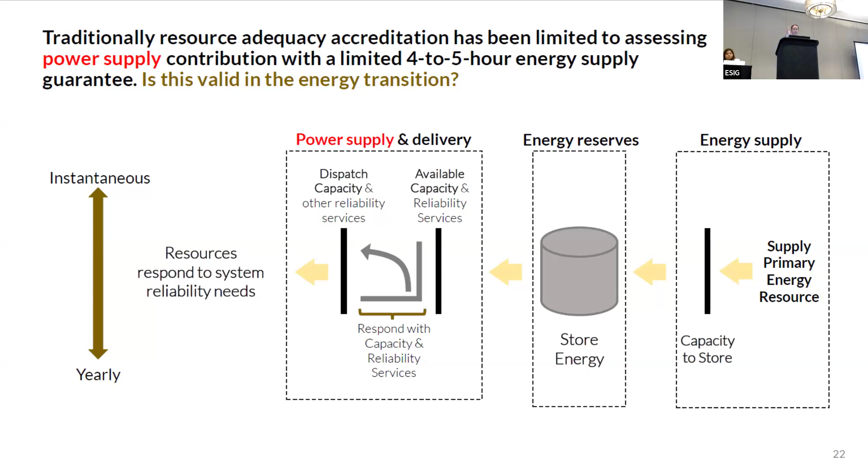And then the capacity is going to respond and provide those services. And then the capacity is going to dispatch and, in a certain amount of time, is going to be able to provide those services. It has to do this on a broad temporal basis—there's power supply, delivery, energy reserves, and energy supply.

When we map that to the system needs, and focus on the longer duration stuff, we see that in the longer duration issues—meeting seasonal and yearly constraints—it becomes very important to think about the attributes associated with energy reserves and energy supply. We need to think about what attributes to look at from an energy reserves and energy supply perspective to value the contribution of long duration energy storage.

So I'm going to show you a quick example in the energy reserves space—the stored energy—of how, when we run production cost modeling, the value of the stored energy changes what the assets are able to contribute, and how the availability of that stored energy changes essentially how much long duration energy storage is able to contribute.

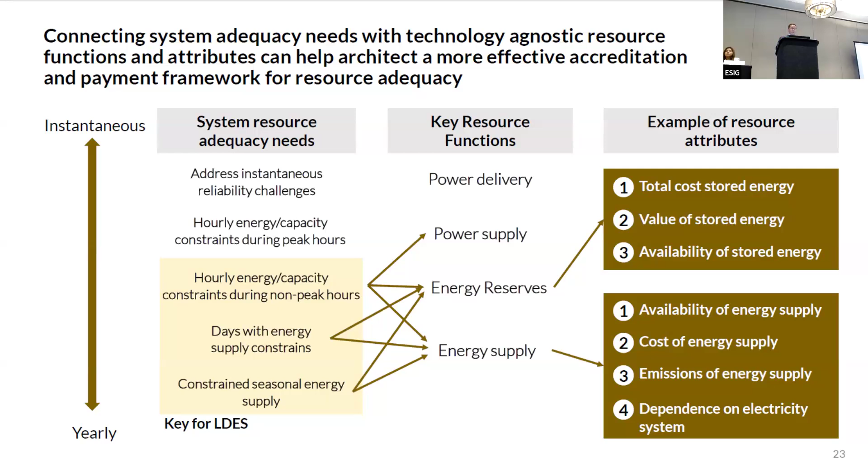So basically we ran three sensitivities for the CPUC's IRP, 2022, using the assumptions of scenarios. The IRP developed by the CPUC installs 500 megawatts of compressed air energy storage, and we used those assumptions. We did three sensitivities on operational state of charge policies to address this issue around energy availability and the value of energy to provide adequacy to the system.

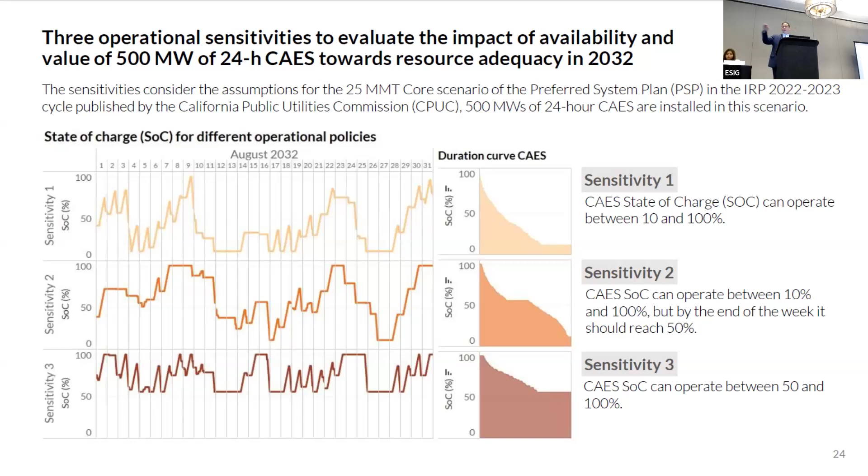And the first sensitivity we ran, we said, okay, let's keep the compressed energy asset to be able to operate however economically most efficient between 10 and 100%. Then we had another sensitivity where we limited, we said, by the end of the week, you should reach 50% essentially.

And in sensitivity 3, we said we need to keep a certain level of stored energy so we could provide adequacy to the system and see how that impacts things. So whenever we look at the results of the most flexible energy use, economic use, which is sensitivity 1, we have 5 different things going on. The first is the average renewable energy generation for 2032 essentially, and the average demand.

Then we have the spot prices, the average spot prices in the different regions. We have the charge and discharge of the compressed air energy facility. We have the charge and discharge of the short duration energy facilities. And then we have the state of charge of the compressed air energy facility and short duration.

So what we see here is that the compressed air energy facility, in an economic manner, really, if you don't set any requirements of how much stored energy availability should be, its tendency will be not to charge because the differentials are not high enough essentially. And the efficiency of the battery leads it to say, I don't want to be charging and discharging because it doesn't make sense from an energy market participation standpoint.

This is not taken into consideration — this is a day ahead type planning production cost model exercise. What we do see is with the shorter duration batteries, those have a very consistent state of charge, but that's not the case with...

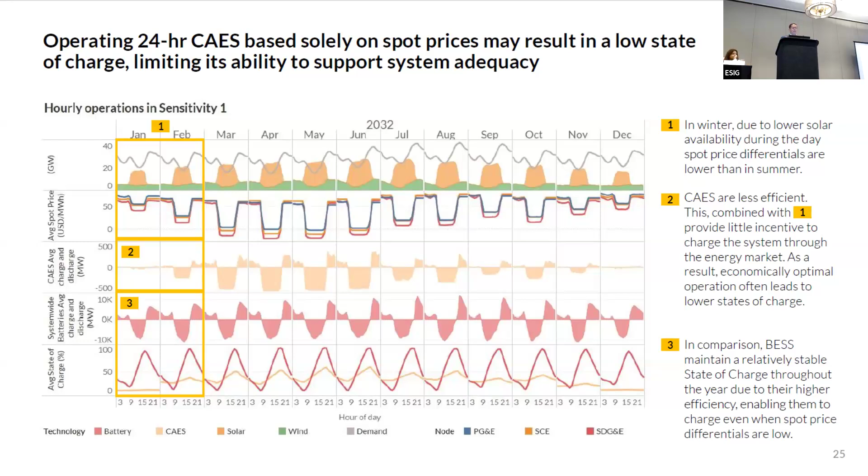But in the third sensitivity we prescribe, there is more state of charge in the battery. That's more expensive to do because you're charging under non-economical conditions, but you're able to provide adequacy for those days where the energy supply is much lower and the demand is very high, essentially.

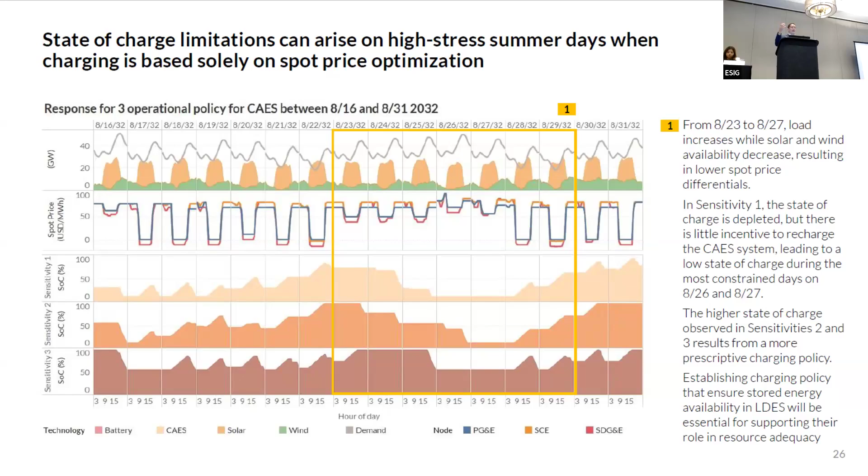So I'll just go briefly through the conclusions. I'm already a little bit over. I think it's important to really expand on how we do resource adequacy evaluation to uncover how long duration energy storage contributes and also how it's accredited.

I think looking at this broad temporal perspective is very important. I think it's also important to do conceptual analysis, to really think about and use other tools prior to doing stochastic risk methods, because the stochastic risk methods do not tell the whole story essentially. So we need to explore what concepts are really going to get us to a reliable and adequate system. We also need a broader range of tools.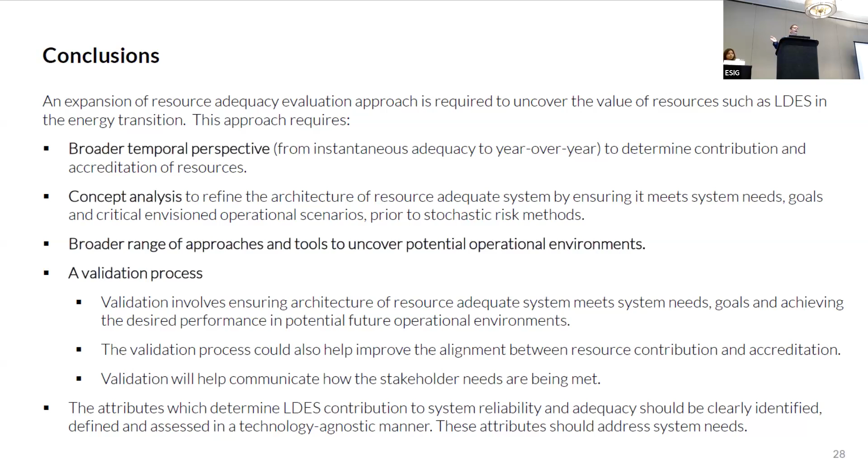We need to establish a validation process as well. The validation process needs to ensure that we meet the system needs and the stakeholder needs through a broader set of operational scenarios. And then we also need to define the attributes of these technologies in a technology agnostic way and see how those actually match up against the system needs, essentially.

And there's some questions that I'll leave there. That's it.

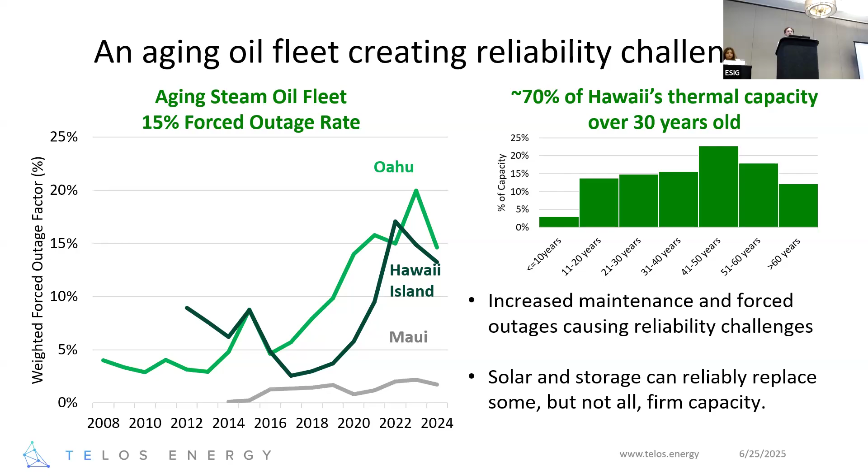So they're on their way, but they can only retire so much with solar, short duration battery storage. There are other resources available, but wind is a bit challenging to site in Hawaii. So that prompts our analysis, which is: let's look at an alternative to firm capacity, or alternative to fuel-based capacity - oil capacity units. We want to look at how we can enable more oil capacity retirements on an aging and islanded fleet using long duration energy storage.

As I mentioned, this is multi-day energy storage, 100 hours. So not quite a week, but a lot longer than the 4-hour batteries that are currently being built on the island today. It's a mixture of like between 4 and 5 hours.

One thing I want to stress is that we're also looking at how new oil capacity, new oil CTs, maybe they could be converted to biodiesel, or maybe they can be converted to some other type of low carbon or zero carbon fuel. We're also going to be looking at new firm capacity resources just as a comparison point.

There's a lot of reasons that folks in Hawaii want to not build new oil capacity. They'd like to reduce their dependency there. But it's important to look at both of those things when we're trying to compare. So our objective: evaluate firm capacity needs at increasing levels of solar and storage. Like I said, you can get some continued reliability with high solar and storage levels, but it does level off.

Quantify how LDES can reduce the amount of firm capacity needed. We're going to compare between new firm capacity, new fuel-based capacity, combustion turbines, internal combustion engines against LDES. And then we're going to also talk about the modeling challenges.

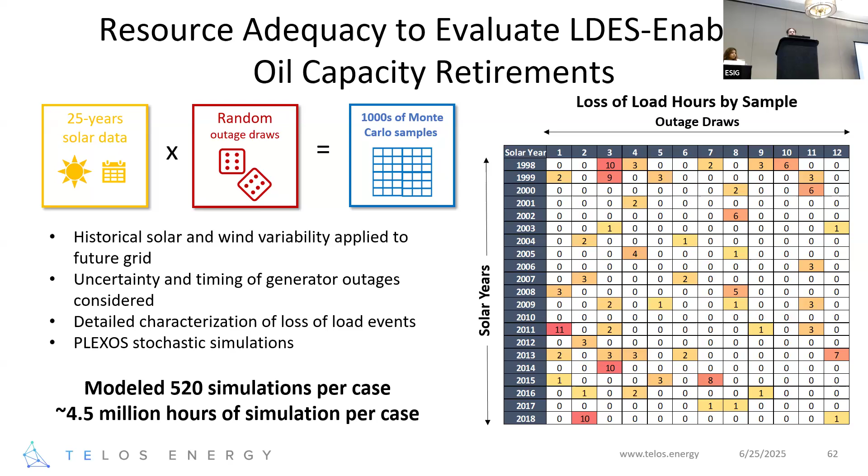In this work for our client, we are looking at expected unserved energy, size, frequency, duration. So those things are important, but we don't have all day.

Before I dive into the RA results, I think talking about scheduling long duration energy storage, particularly multi-day, at least in my experience, is challenging. And Donny alluded to this.

Just to walk us through a simple example, this is our model with one sample, one draw of outages and weather. And we get this problem where without foresight beyond our 1 day or even a couple day dispatch—this is a 1 day look ahead—without foresight or operating rules, this battery has low energy efficiency or low charging efficiency. So it just takes whatever the starting energy we gave it was and just draws it down and barely uses it again, because it's not a valuable asset unless it can see further in the future.

This is when we're talking about that forecasting that we've been discussing for the past day and a half being really important for the actual operations. And we're looking at a small forecasting window, and we don't want to have it have too much perfect foresight. So we're going to assess different methods to balance realism, cost, and reliability.

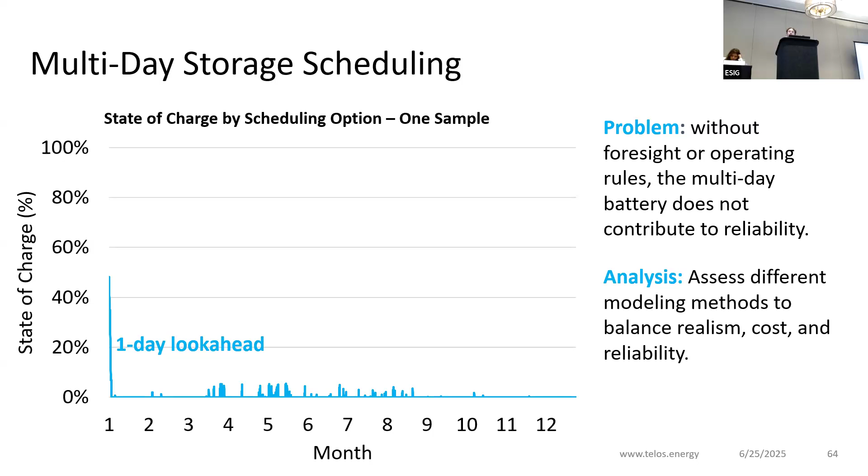Right now, we're focused mainly on this reliability and realism without giving too much foresight. Later on, not here, we'll be talking about looking at the cost trade-offs of different operating regimes. So what we can do is give our battery model that 1 day look ahead, and then we can give it a target.

Say, hey, let's hit 70% state of charge and give it a penalty. So it's a soft constraint in your model. That does require a little bit of tuning for those familiar with these energy penalty targets.

Thankfully, we can run a lot of simulations in Hawaii to sort of get that optimal value and then look further down the line at how that changes the cost of the system. But there's definitely a sweet spot in the Oahu system for what that price of energy should be, sort of in the tank of the battery.

Either way, what it does is it reaches its state of charge and it sits there, but it doesn't ever go really above it. Some of those little squiggles are because we have a self-discharge. That's kind of the main problem here. We never get above it, so we still get unserved energy in some of these examples.

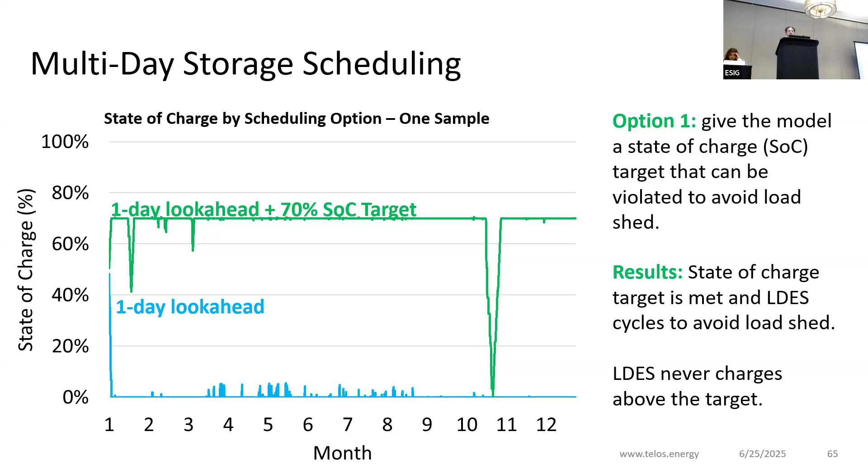We can then do a 70% state of charge target, but give it a decomposition, take that year, do some more aggregated analysis, not as granular, and then get a decomposition of storage targets. The problem is that decomposition has a little bit too much information on what those outages look like.

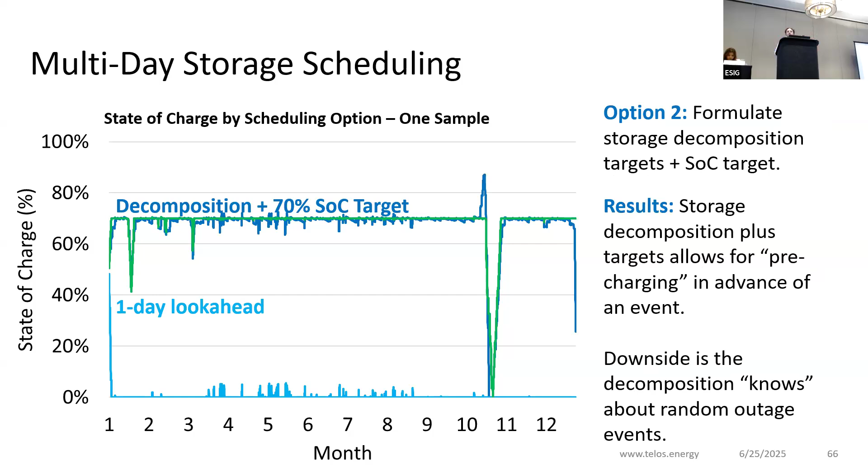And we don't want that in a risk model. So we opt for the state of charge target with a penalty price.

To illustrate this in a little bit of a different way, I like these charts. We've got our multi-day storage SOC, a one week rolling average of solar, and then one draw of thermal forced outages on this Oahu system. So you can see we're at that state of charge target.

We're drawing down maybe when we've got outages. We're drawing down when we've got low solar. And you can really see we've got this period. This is from one sample draw of a really intense or really low period of solar where we're drawing down that long duration battery, and we've got some thermal outages at the beginning.

But we do have a loss of load event once that battery is drained. And so that's really the challenge we're trying to quantify: how often are you hitting these events where either the duration of the battery is the limiting factor, or maybe it discharges and then it has to recharge.

And that's kind of what we illustrate here with another outage draw where we've got a different battery profile where it charges down, but then you've got some periods of additional forced outages that happen in your next model run.

Where you're like, actually, we discharged all the way down and then we had another high outage event on this island system, and that gave us a loss of load event.

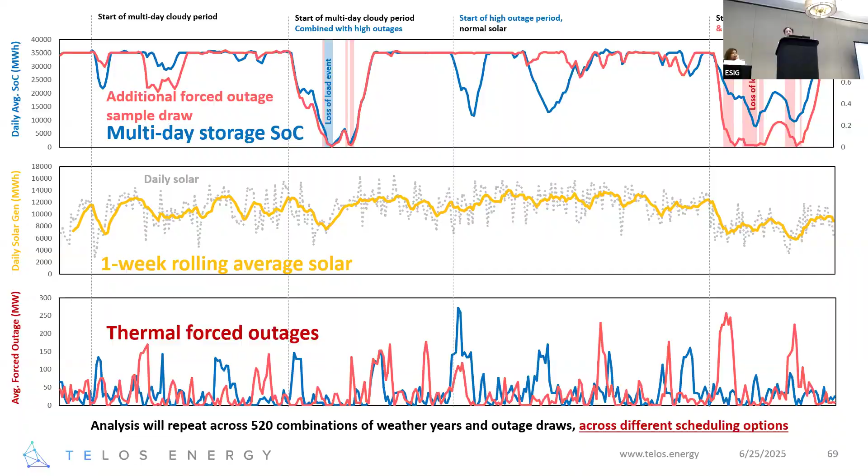So we did this analysis for each of these cases. It's 520 samples across an entire year. So this is where we started with.

Obviously, there's no 100-hour batteries currently deployed, certainly not at 350 megawatts of scale. But this is illustrative of some of the benefits that you might be able to receive instead of building new firm capacity, new fuel-based capacity. I should be careful with my words. And so this is that comparison.

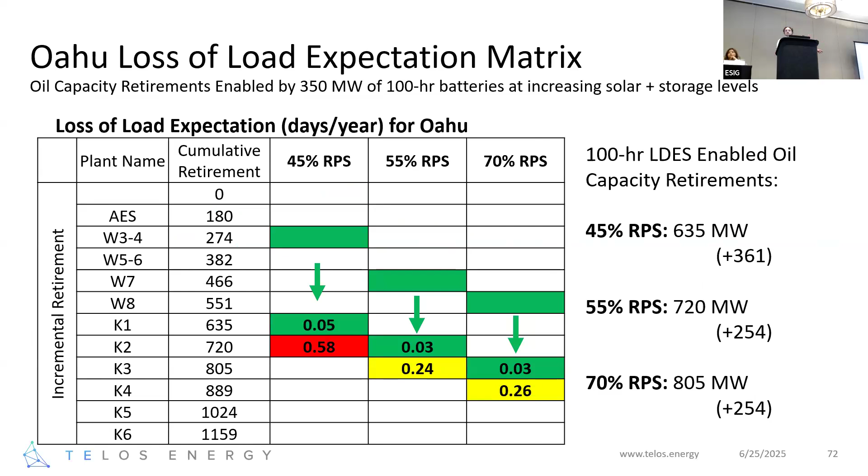I've showed you guys this chart, right? These different LOLE metrics. This is all based on that state of charge target and that 70% state of charge target and some decomposition.

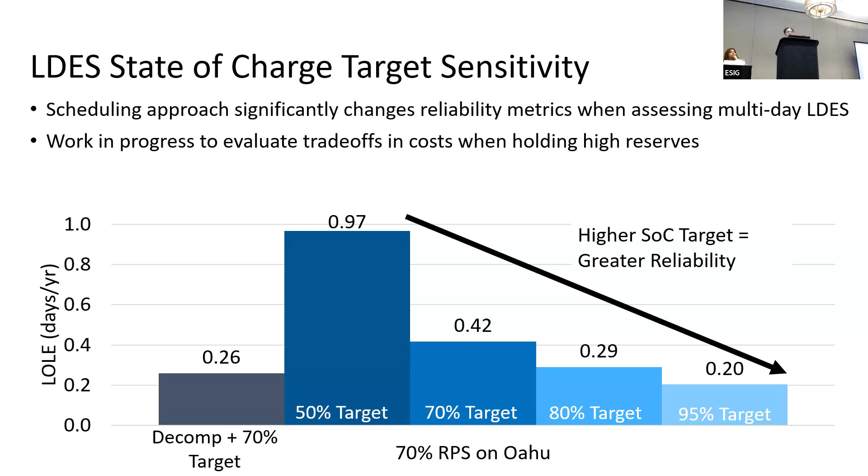Lastly, I want to end with looking at the 100-hour LDES versus new oil CT capacity value. So we did ELCC analysis on this. We've been looking at loss of load expectation for the reliability metrics here, but what we did is we had the systems at this 0.1 LOLE to start our ELCC analysis.

We used expected unserved energy to get us back to find that ELCC, because one thing that you see when you go further out in higher solar and storage levels, or just higher battery storage as your capacity resource, is that your expected unserved energy metric can really explode—maybe 'explodes' is a bit of an exaggerated term—but it grows relative to what you had in a non-storage based portfolio. So we used EUE to get back to that 0.1 system.

And that's where you really see that, relative to the fuel-based units that are new and have low outage rates, LDES performs pretty well, especially in a high solar and storage system. We're talking about 70% RPS. We've got almost as much battery storage as the peak load on Oahu.

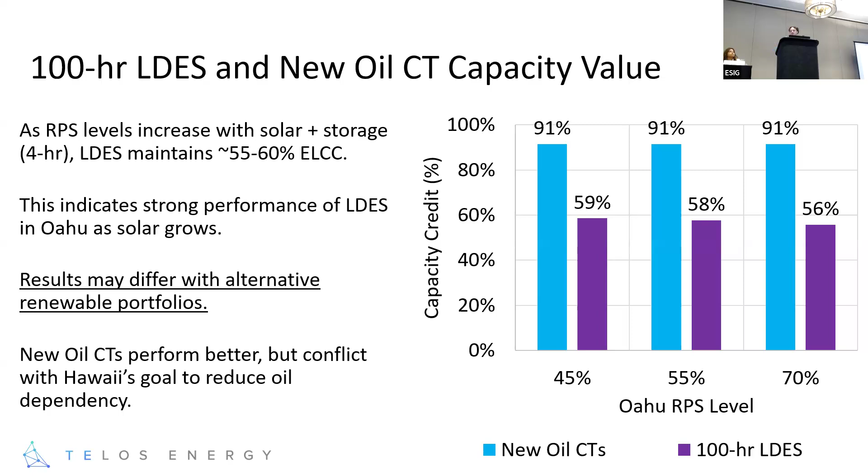So 4-hour storage has little to no ELCC in this system, but your 100-hour battery is actually pretty consistent across these different RPS levels, which we think is a pretty interesting result that we're going to dive deeper into, looking at more of those metrics and charts, and also looking at optimal portfolios. We looked at some of those portfolios with pump storage in the TVA example. We want to look at that for Oahu as well, and do some more of this analysis.

So the quick takeaways, as I'm about out of time: remember, island systems are unique. Their risk profile is different than the mainland. So this analysis is applicable to anybody in terms of what you're going to run and the probabilistic RA work and the state of charge targets. But the way that outages and the way that the degrading fleet in Oahu contributes to the benefits you see from LDES or the benefits you see from new oil resources—it's going to be unique relative to other locations. But the principles of how to model this and the challenges still apply.

Multi-day batteries in Oahu maintain a high ELCC above 55%, even at very high RPS levels with very high short duration storage penetrations. So it's a promising resource to defer oil capacity on the island. But certainly it does have limitations, as you saw in those charts, and that might be due to the portfolio, or it might be due to just the inherent energy limitations that we have on a small system.

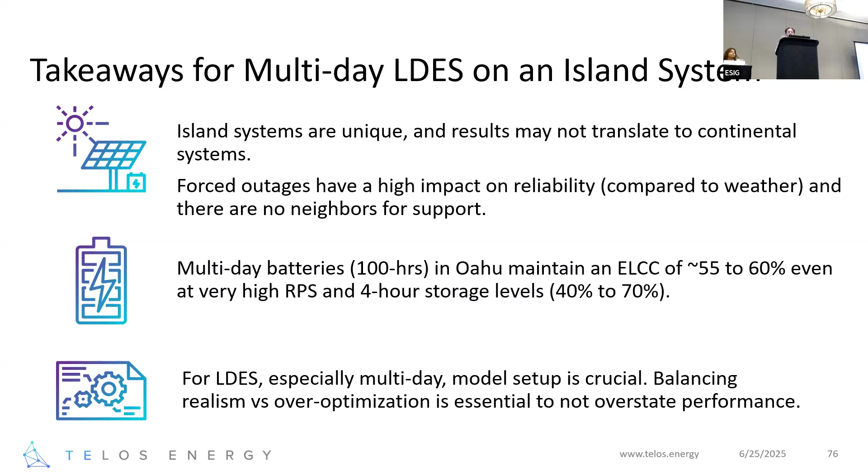The model setup is really crucial, as you saw in those reliability metrics. Depending on what you choose, you're going to get very different results. You're going to throw out LDES and say this isn't useful, or you're going to say this is great, and I can get rapid decarbonization of my island system or my system in general. So I think this is still an area of continuing work, and thanks for your time.